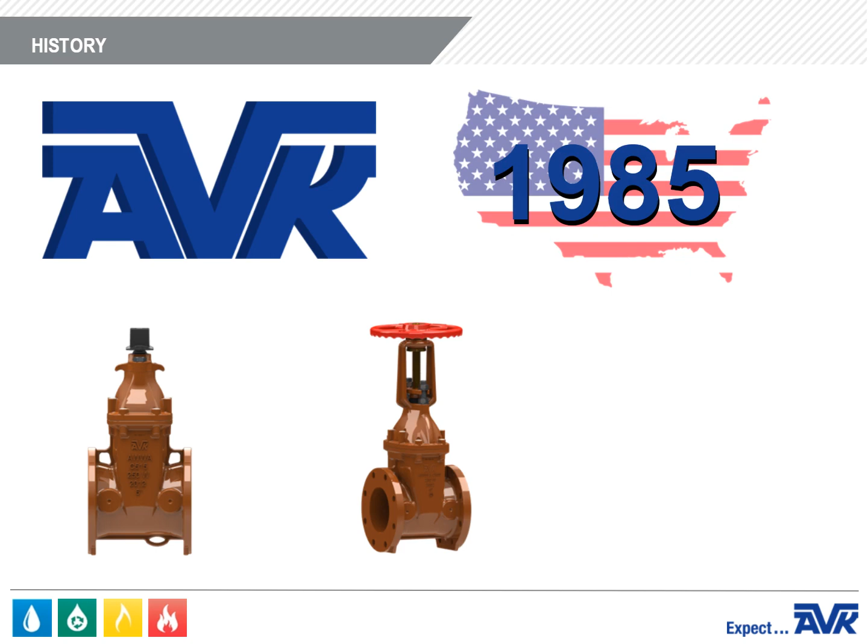American AVK was incorporated in the United States in 1985 and primarily sold AVK gate valves in the North American water distribution market. But AVK soon realized that to be competitive, they needed a fire hydrant to package with the gate valves. So in the early 1990s, AVK began manufacturing the Series 27 dry barrel fire hydrants.

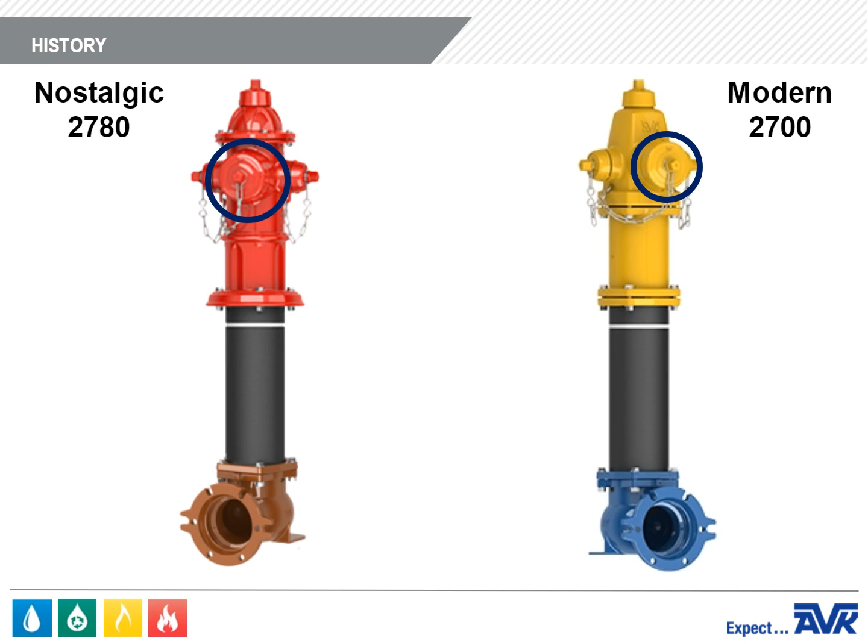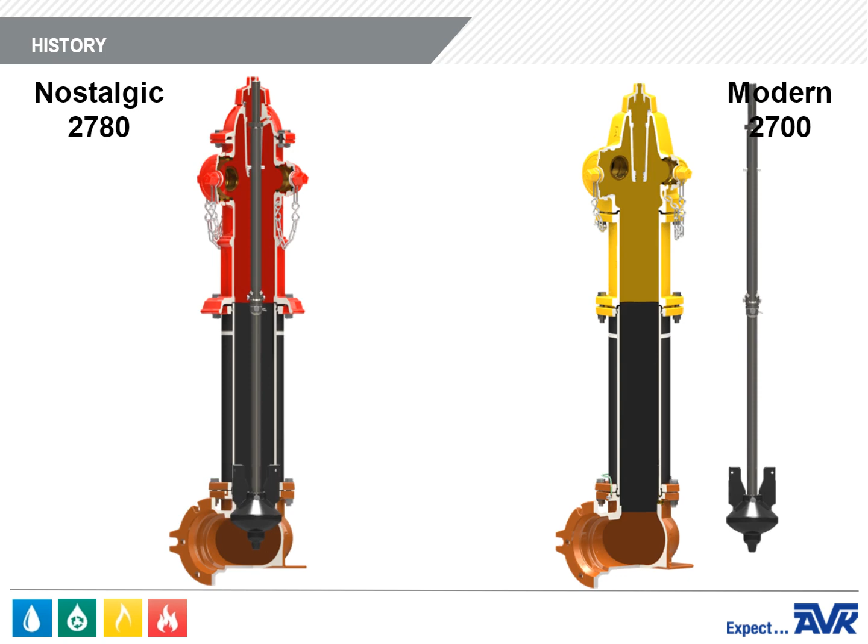AVK manufactures two types of dry barrel fire hydrants: the nostalgic style, Series 2780, and the modern style, Series 2700. The two Series 27 fire hydrants shown here have one pumper outlet and two hose outlets. The nostalgic style is red and the modern style is yellow. Both have a standard 6-inch mechanical joint inlet shoe and standard 1.5-inch pentagon-shaped operating nuts. Keep in mind that all of the parts for the 2700 and the 2780 are interchangeable.

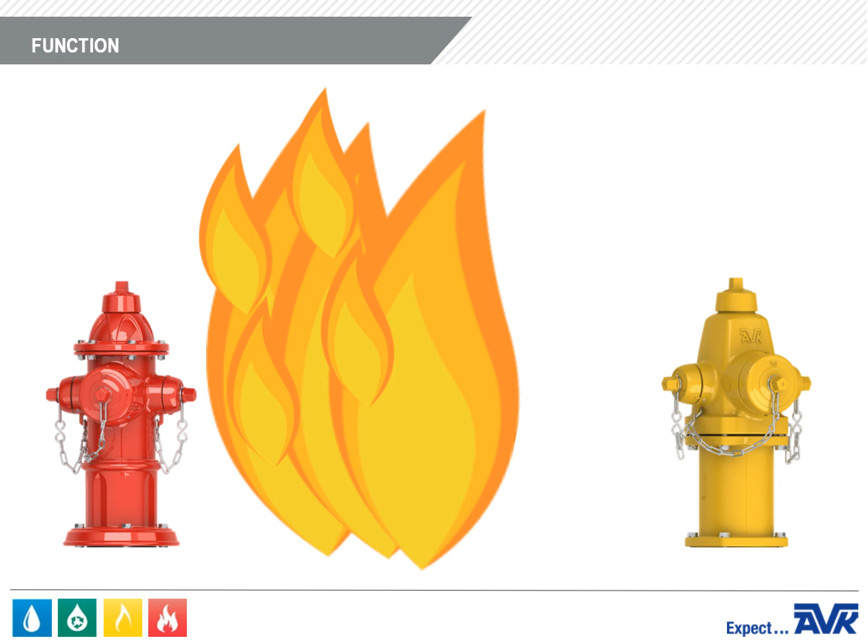So what is a fire hydrant used for? The primary and by far most important function of a fire hydrant is to provide a source of water in order to fight fires. But fire hydrants also serve other purposes, like flushing water lines, filling water trucks, especially at construction sites, and occasionally serving as a construction bypass.

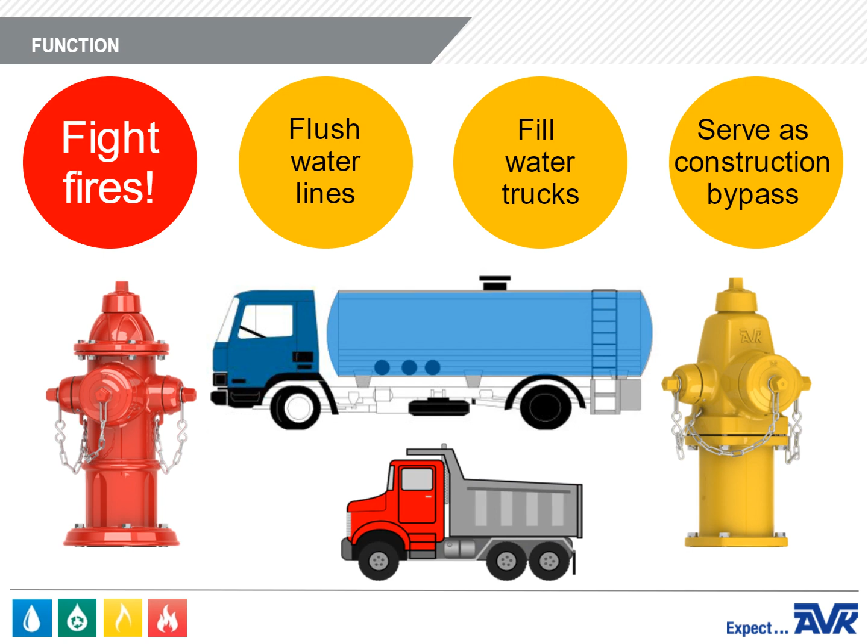AVK fire hydrants are fully compliant with the requirements of AWWA Standard C502 for dry barrel fire hydrants. In fact, AVK hydrants exceed industry standards in regard to flow characteristics and durability. Our hydrants are also listed by Underwriters Labs and approved by Factory Mutual. Finally, all AVK fire hydrants are certified to NSF 61 for health effects and NSF 372 for the low lead requirements of the Safe Drinking Water Act.

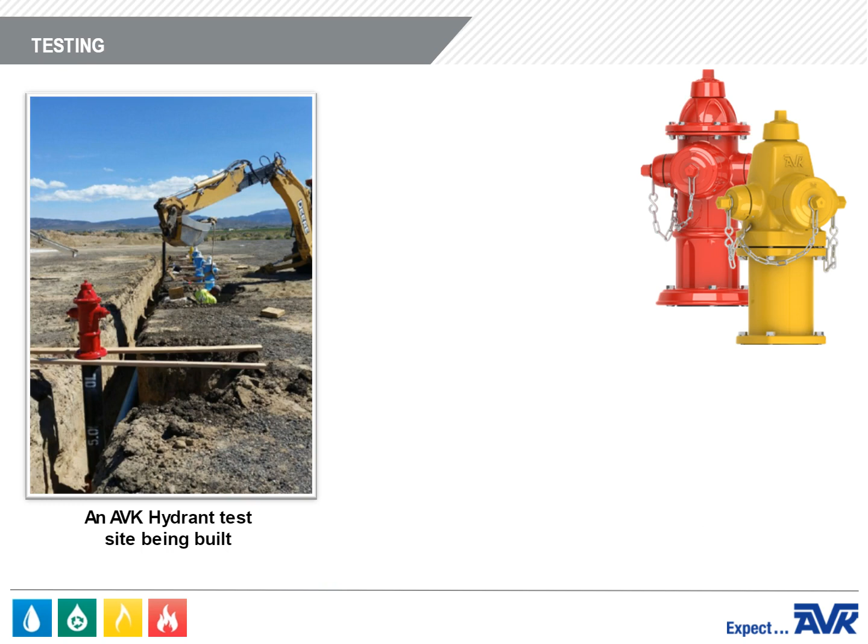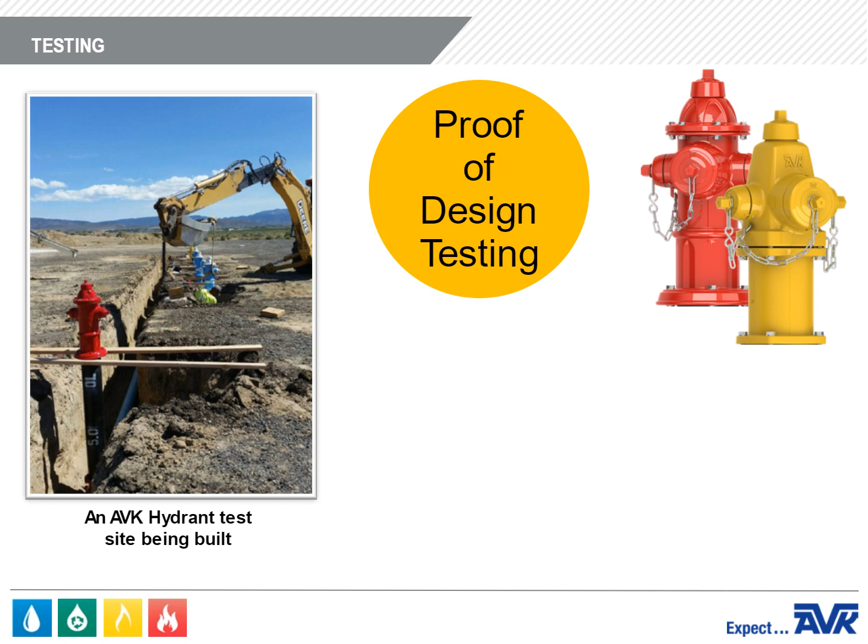Be assured that product quality and safety are our main concerns throughout the design and manufacturing process. Each hydrant is shell tested and seat tested at twice the rated pressure as required by AWWA C502. In addition, we have completed proof of design testing, a shell test of 1000 psi per UL requirements, traffic impact testing, and flow testing. So what makes up an AVK fire hydrant?

Starting at the top of the hydrant is a serial number. This unique number indicates the date of manufacture, testing results, construction materials, and shipping information for full traceability to allow for the industry's quickest and most comprehensive customer service.

Next is the weather shield. The weather shield is a hat-shaped part that sits on top of the hydrant. As you might expect, the weather shield protects the operating mechanism from the elements, like rain or snow. It also protects the bronze operating nut from damage from non-standard wrenches. So if someone tries to operate the hydrant with a pipe wrench, it might damage the ductile iron, but it won't damage the bronze operating nut. And in the unlikely event that the weather shield does get damaged, it's easier and less expensive to replace than the bronze operating nut.

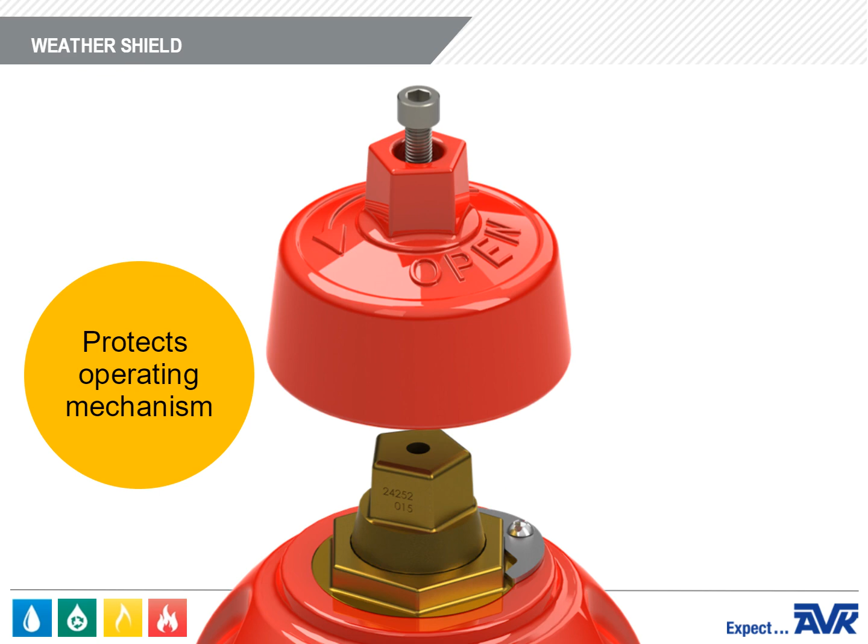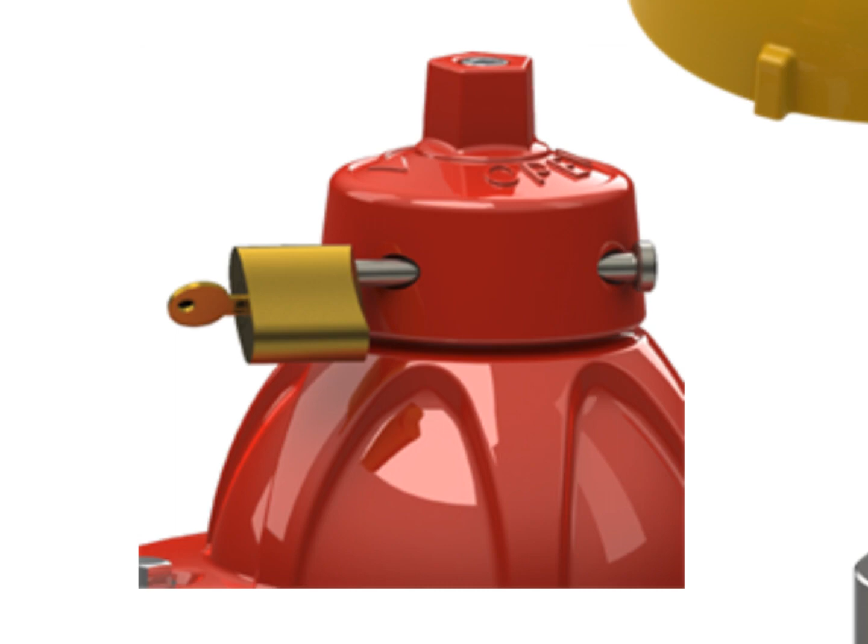The AVK weather shield and nozzle cap operating nuts can be manufactured in a variety of shapes and sizes to meet the needs of local specifications. In areas that require protection from tampering, we can also add locking mechanisms, which can be installed during the manufacturing process or in the field. Or we can add a tamper-proof operating nut.

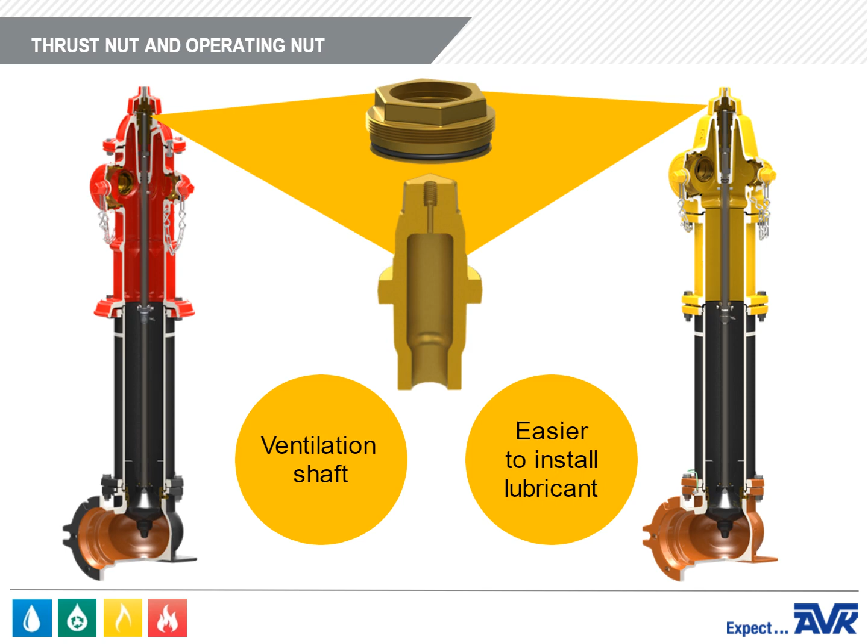The thrust nut and the operating nut are cast bronze. The operating nut can be either open left or open right. The operating nut is manufactured with a ventilation shaft that works in conjunction with the Zerk fitting for ease of installing lubricant. The nut is also provided with an upper and lower anti-friction washer to ease operation. The operating nut and the thrust nut are also equipped with a series of O-rings to isolate the lubrication chamber from the environment. The thrust nut is held in place by a stainless steel thrust nut lock plate and screw.

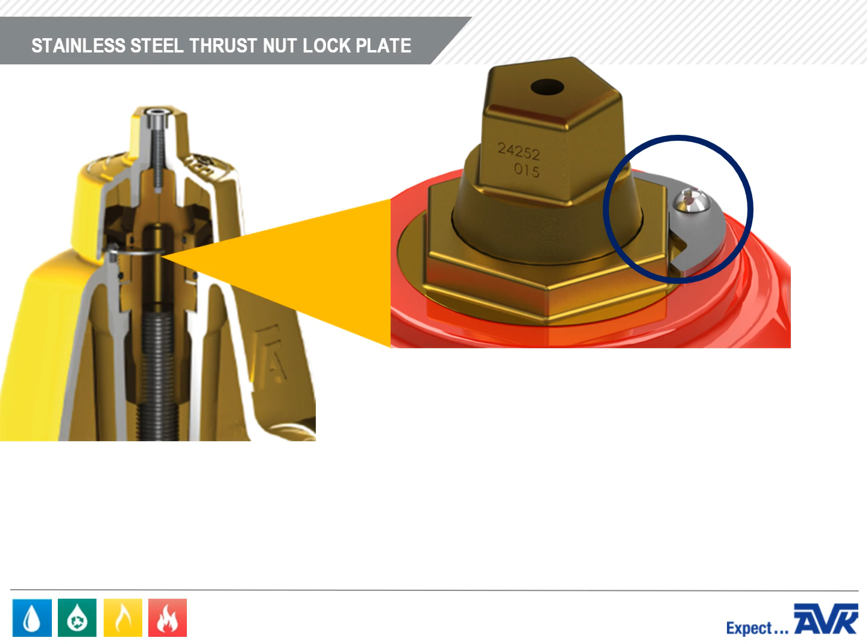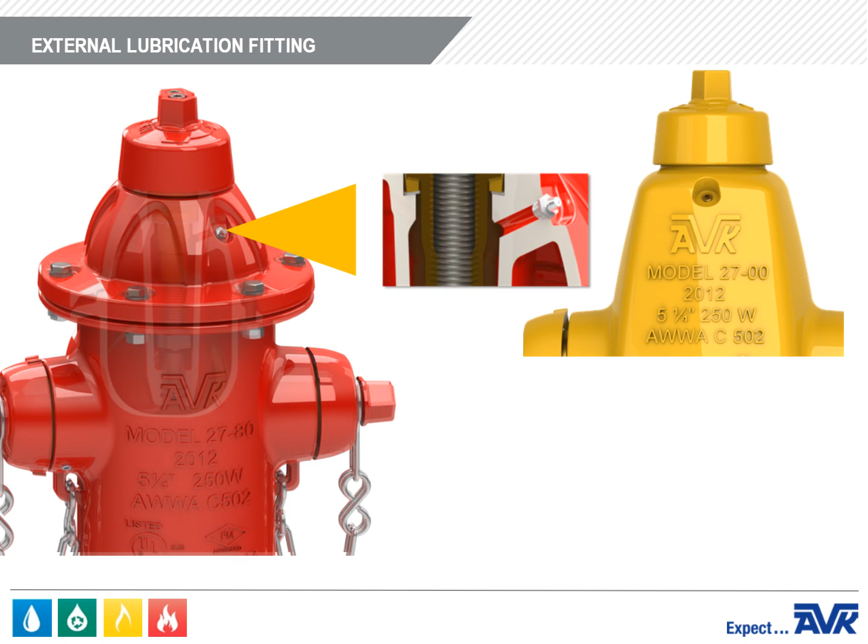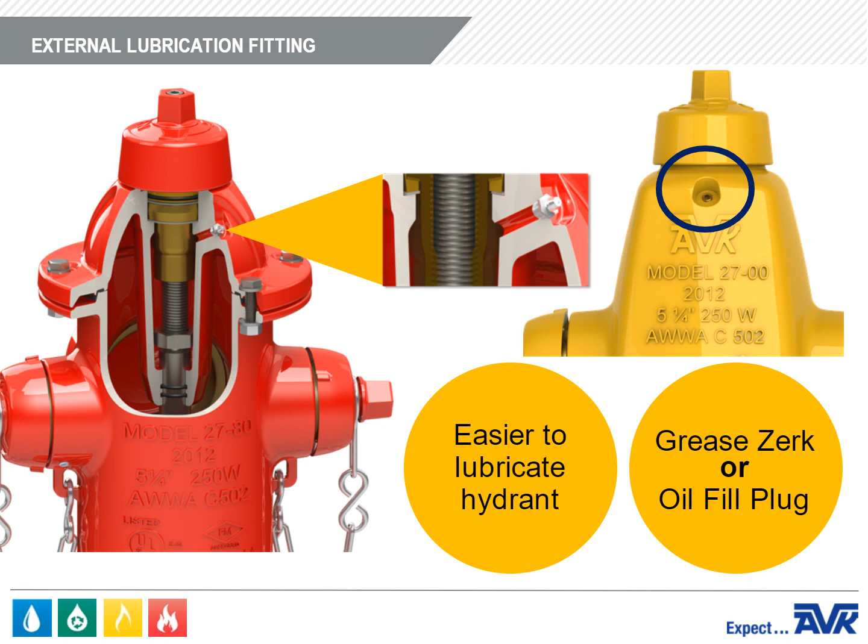The plate is non-corrosive, and it makes it easier to adjust the nut in case the nut is too tight or too loose. AVK fire hydrants are equipped with an external lubrication fitting, making it easier to lubricate the hydrant. No disassembly is required. The fitting is a grease zerk for grease-filled hydrants or an oil fill plug for oil-filled hydrants.

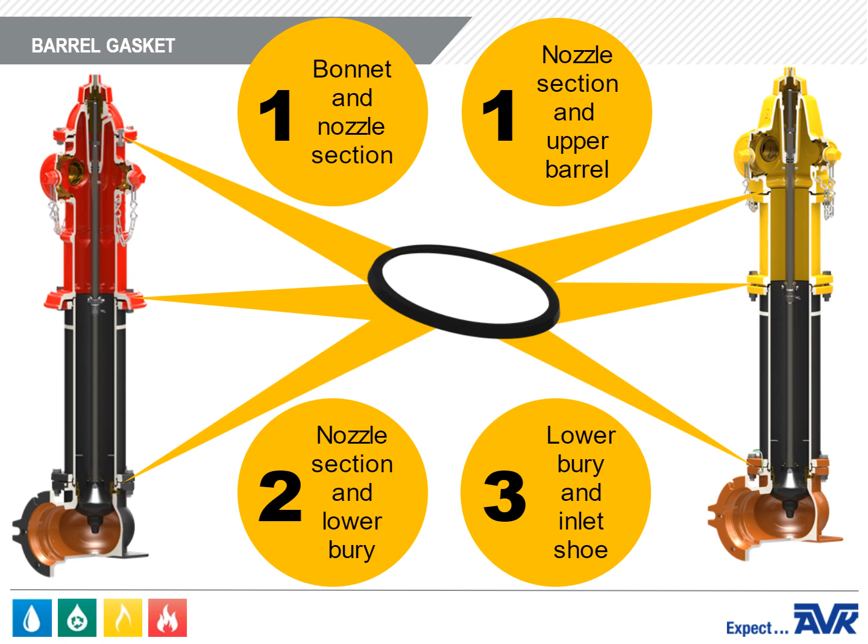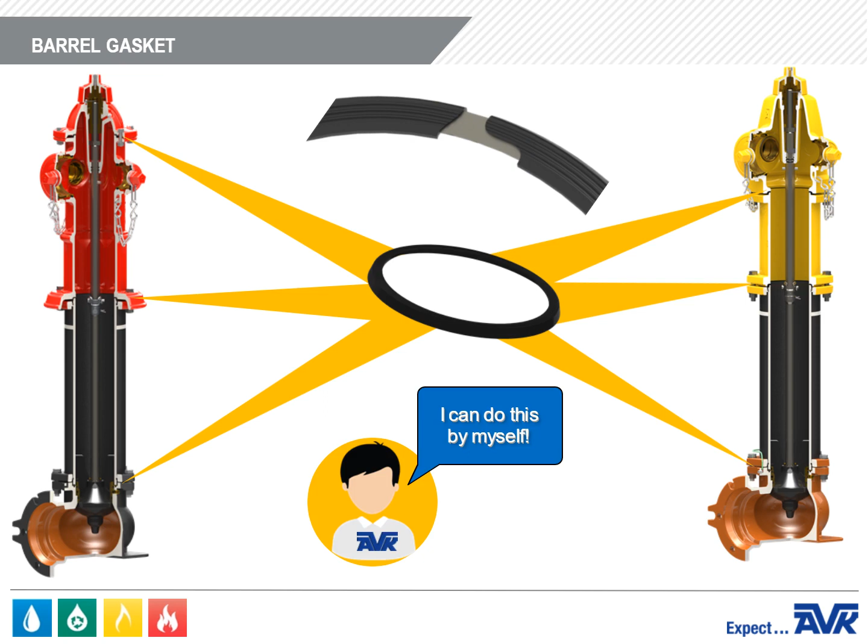Next is the barrel gasket. Three barrel gaskets are used in our dry barrel fire hydrant. The first is used between the bonnet and the nozzle section on the 2780 nostalgic style, or the nozzle section and the upper barrel for the 2700 modern style. The second is between the nozzle section and the lower barrel. And the third is between the lower barrel and the inlet shoe. It's a simple part made out of NBR. It has a steel insert to help hold its shape, so when you place it on the sealing surface it will stay in place. This feature also makes it much easier for one person to reassemble the hydrant.

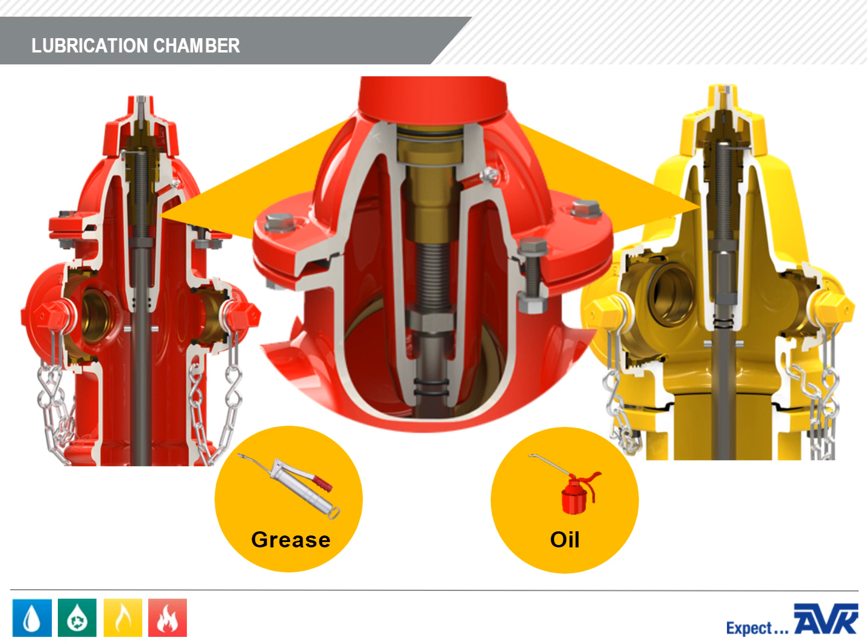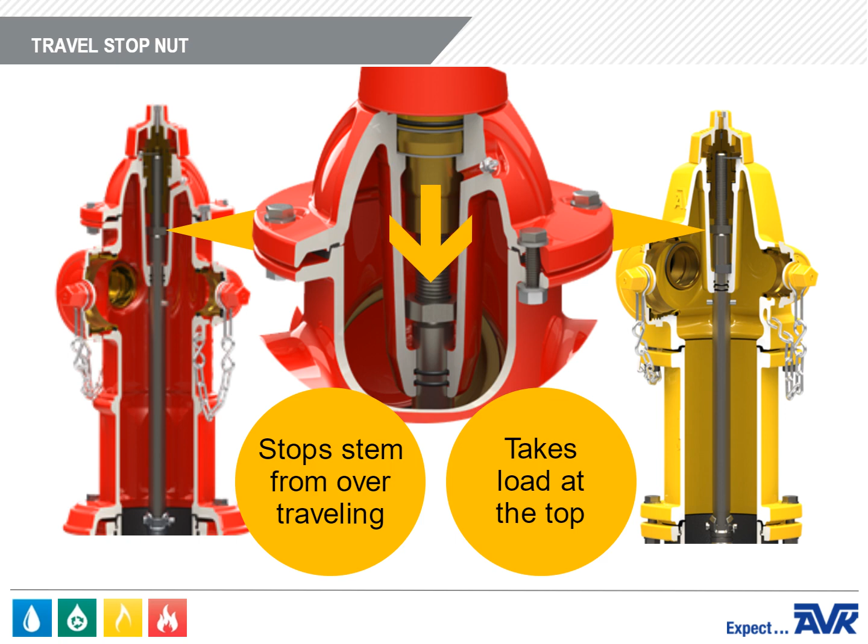Next is the lubrication chamber. It holds the oil or grease to lubricate the operating mechanism for the hydrant. It's sealed with 2 O-rings on the bottom for redundancy and another O-ring at the top to prevent moisture from getting inside. The travel stop nut is used to stop the stem from over-traveling when opening the hydrant. The travel stop nut takes all of the load at the top, so that the main valve and the stem are not damaged by having a compression load on them between the top and the bottom of the hydrant.

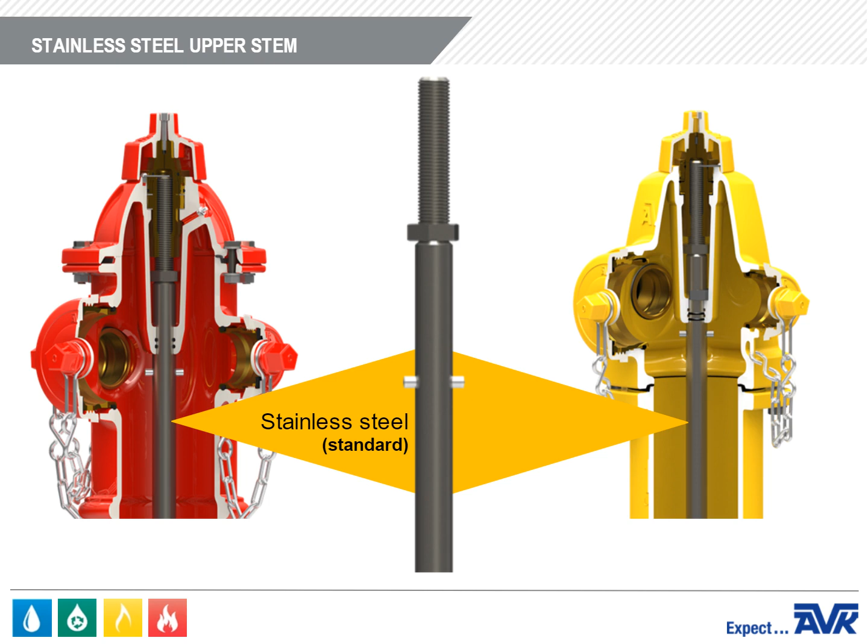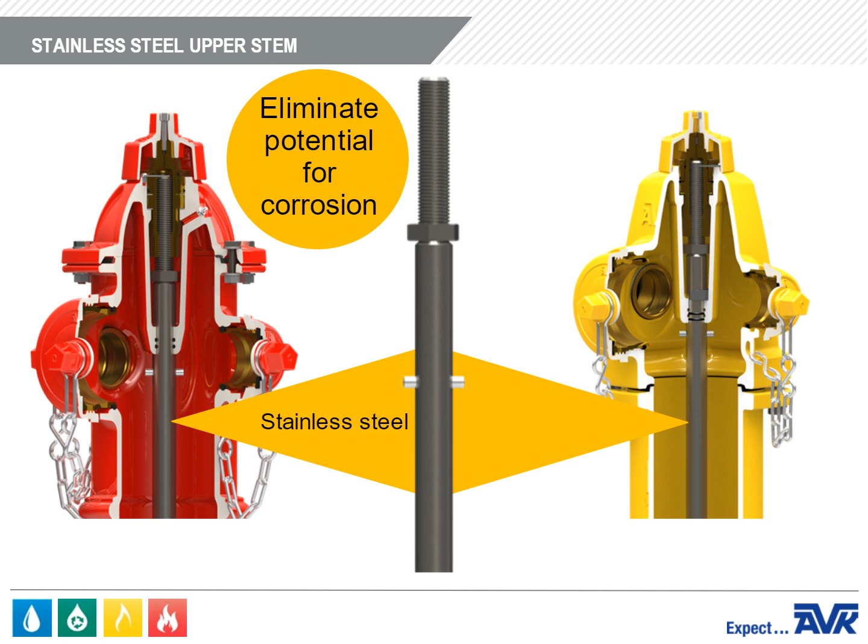All AVK upper stems are stainless steel as standard. However, AVK will supply a copper alloy sleeved upper stem if requested. AVK has chosen to provide stainless steel operating stems to eliminate the potential for corrosion on this vital part of the hydrant operating system. AVK stainless steel upper stems also have the benefit of having a machined smooth surface to seal the O-rings, thus allowing for the elimination of the old soft copper alloy sleeve to seal the reservoir from water intrusion. Removing the copper alloy sleeve eliminates freezing and corrosion that can occur behind it.

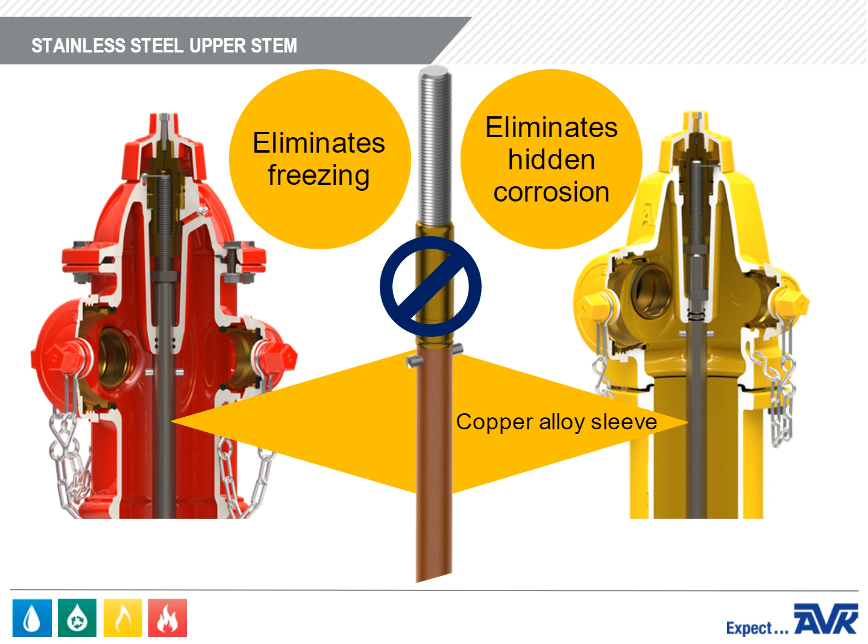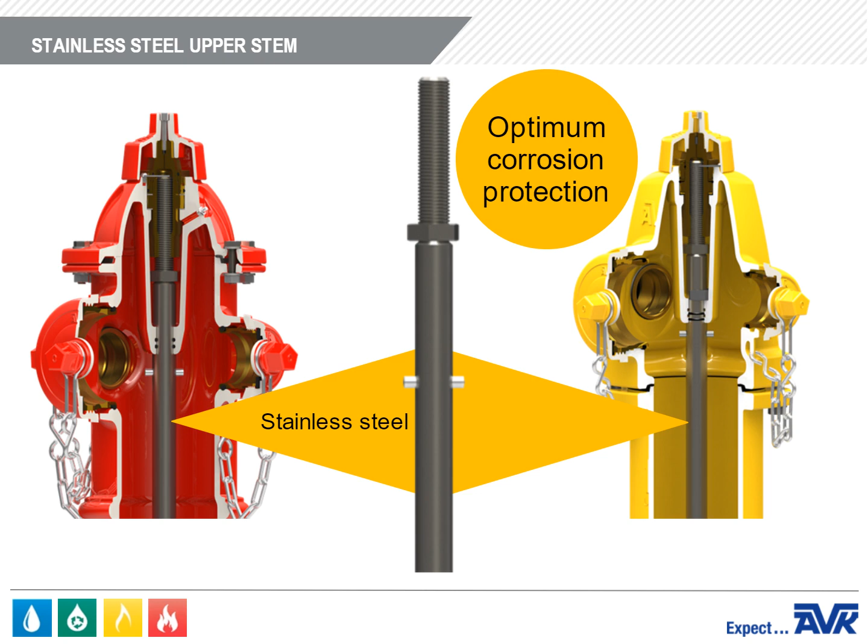Freezing will cause the sleeve to crack, and corrosion will make the hydrant impossible to operate. AVK stainless steel upper stems provide optimum corrosion protection, preventing water that may get into the lubrication chamber from causing the upper stem to corrode. The hydrant wrench pin, located on the upper stem, enables removal of the main valve with a lightweight AVK T-wrench, which makes the hydrant much easier to maintain.

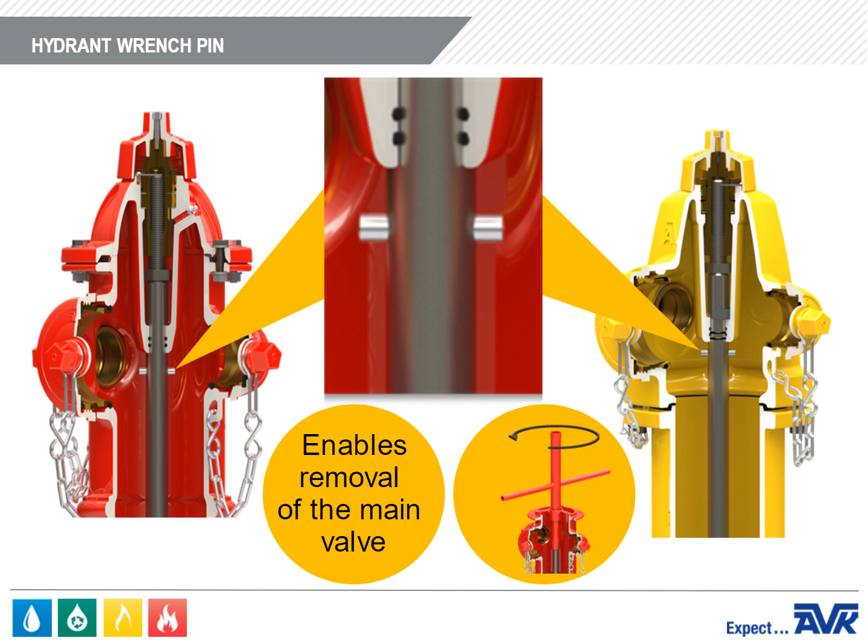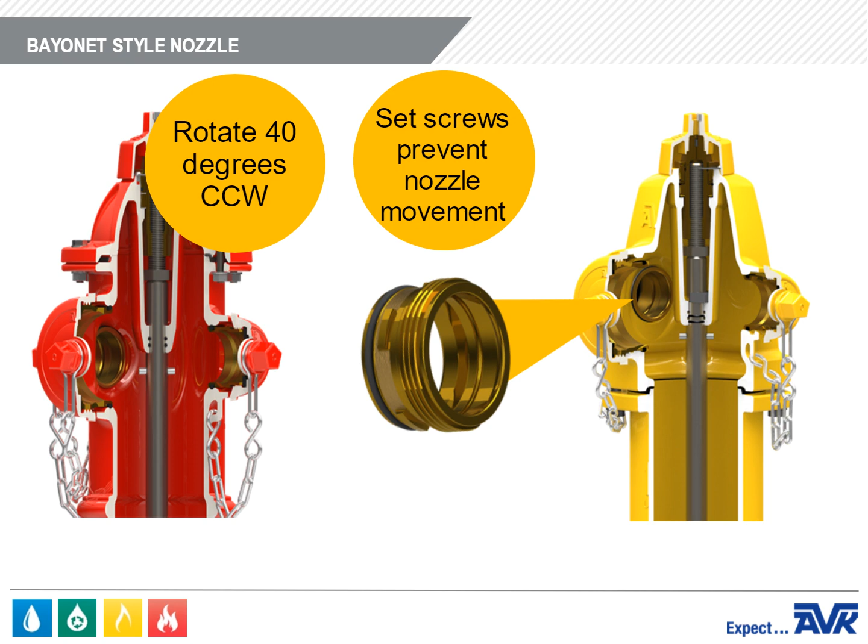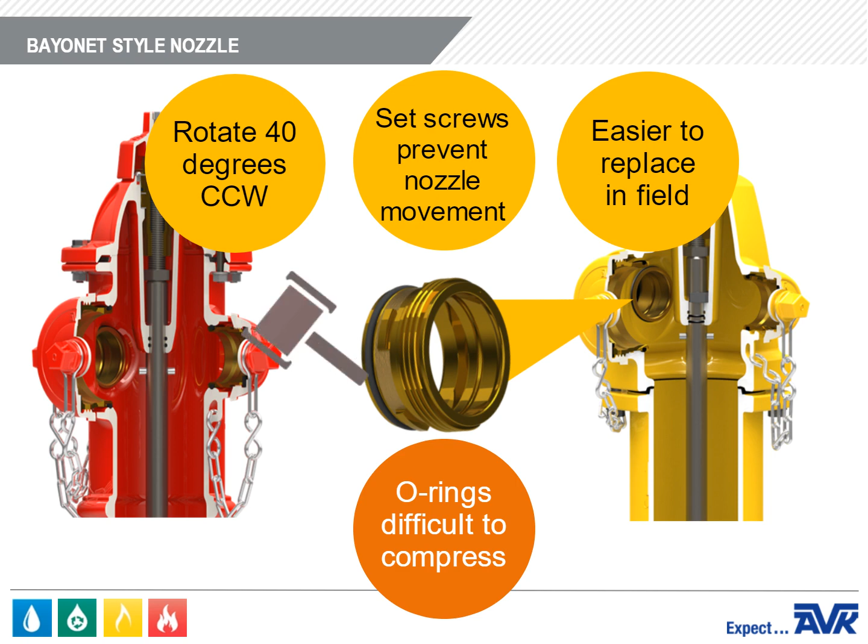Next is the AVK bayonet style nozzle. This nozzle is easy to install. Simply rotate it 40 degrees counterclockwise to lock it in place. There are 2 set screws to prevent it from rotating out and also to help prevent nozzle movement. This feature makes the nozzle much easier to replace in the field. However, it should be noted that the O-rings can be difficult to compress, so you may need a rubber mallet to tap the nozzle into place when you're installing it.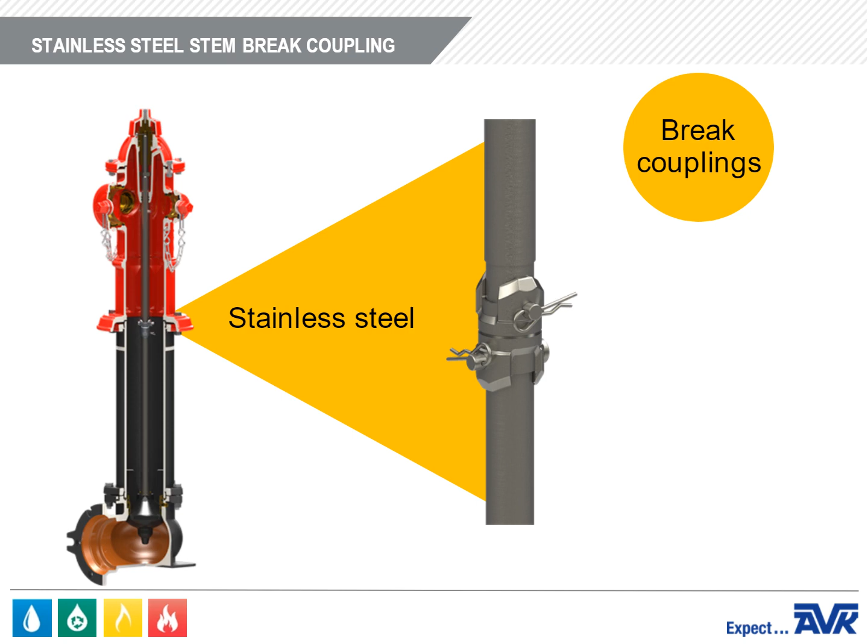To further resist corrosion, AVK uses stainless steel break couplings, extension couplings, and coupling pins on all our dry barrel fire hydrant models. The use of stainless steel assures a longer lifespan due to the more durable materials. This low-profile design also helps improve the flow of the hydrant.

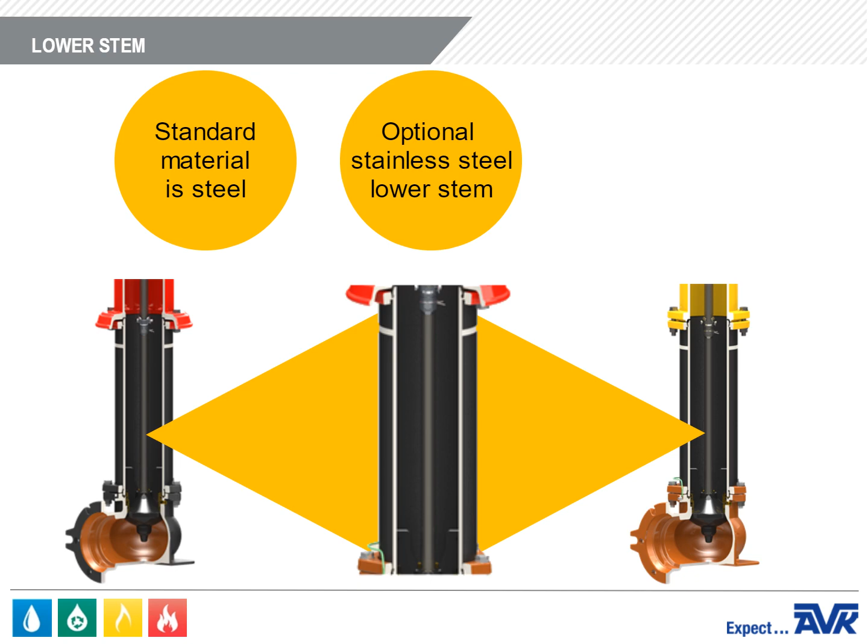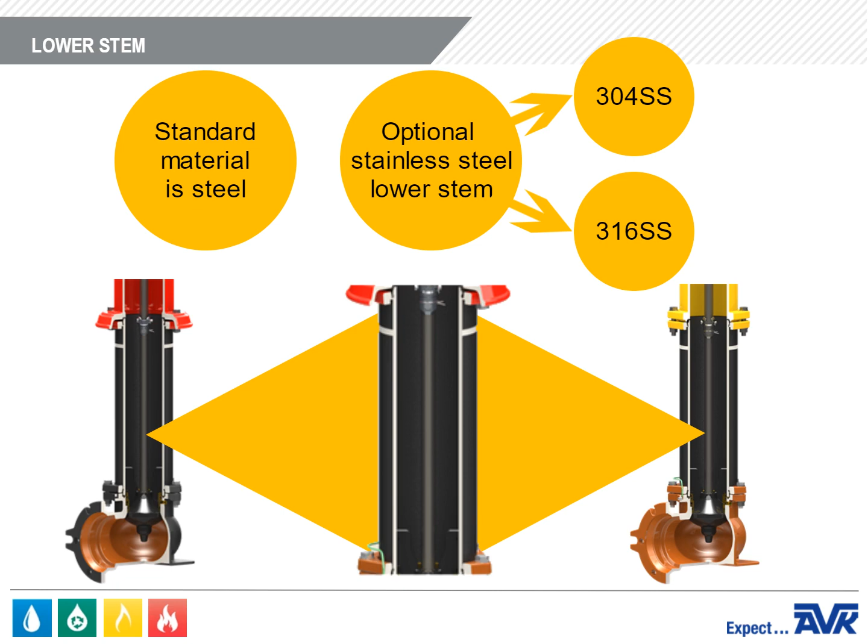The standard material for the lower stem is steel. However, for an additional cost, AVK also offers an optional stainless steel lower operating stem. A stainless steel lower operating stem will reduce the corrosive effects of standing water within the lower barrel of the hydrant. Both upper and lower stems can be provided in 304 stainless steel. They can also be provided in 316 stainless steel for utilities or private industrial facilities that experience very aggressive waters for their major source of fire protection.

Next is the breakable joint, which also includes the stainless steel break coupling for the stem. It uses a standard barrel gasket, so it's easy to reassemble and replace if it gets broken. It's designed so that the ductile iron lip on the break flange will tear out if the hydrant is impacted by a vehicle. There are only 4 bolts, so it's easy to repair. The bolts can be loosened and the nozzle section can rotate 360 degrees so the nozzle can point in whatever direction needed.

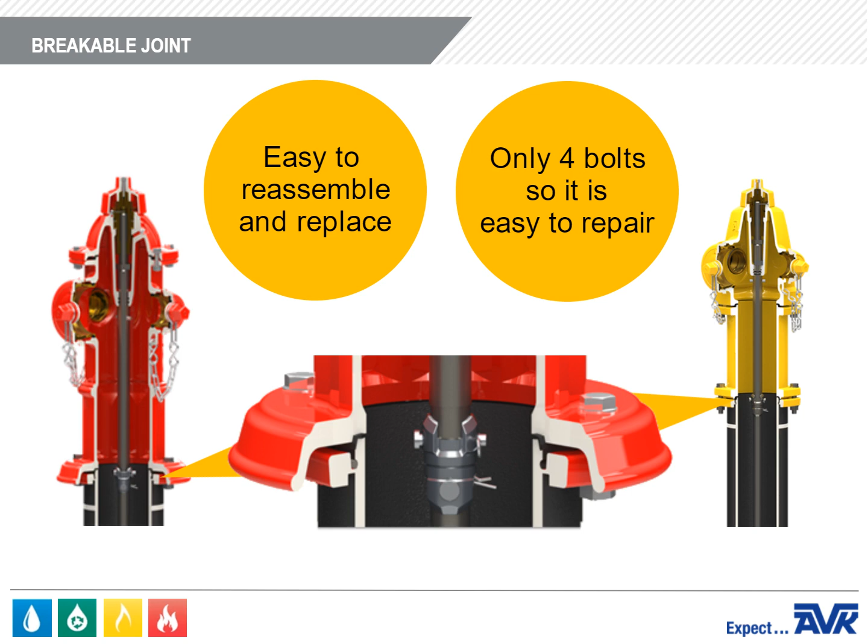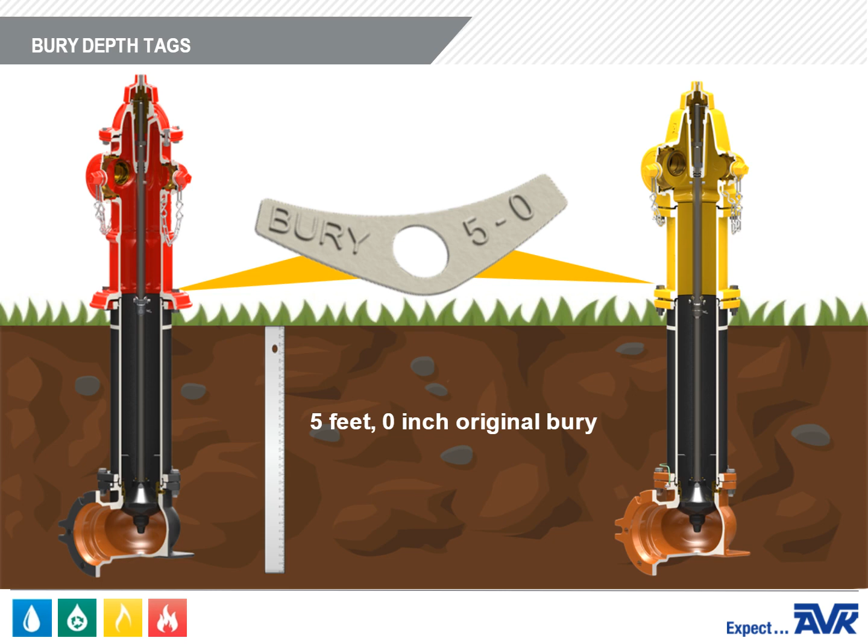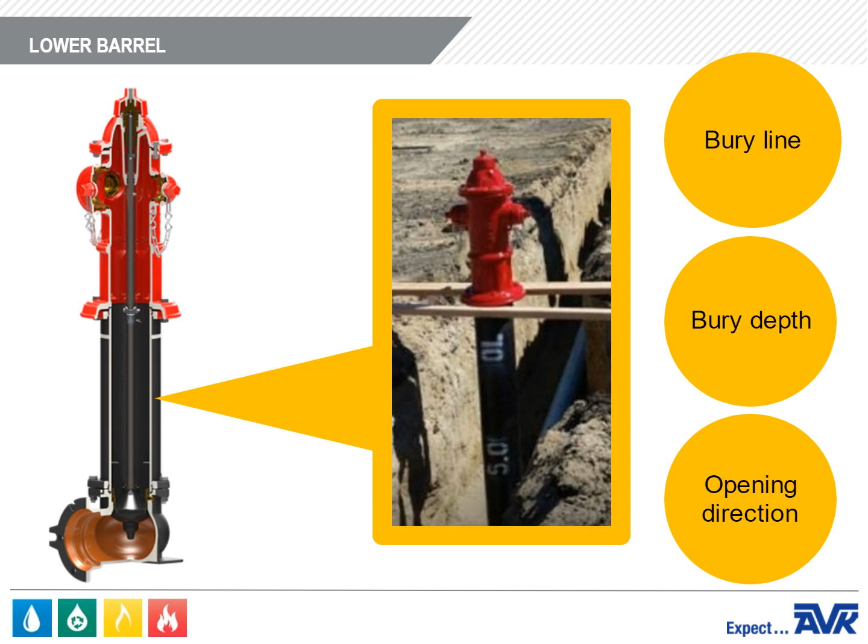At the ground level of the hydrant, AVK installs bury depth tags. This is so it's easy to determine the bury depth by looking at the base of the hydrant when it's installed. The tag here shows a bury depth of 5 feet. The extension kits are also equipped with a bury depth tag, so it can show a 5-foot original bury and a 6-inch extension kit. The lower barrel is ductile iron, which allows the lower barrel to be strong but also lightweight. The lower barrel is also stenciled with the bury line, the depth of bury, and the opening direction. For example, a 5-foot bury open left hydrant will have 5.0 and OL stenciled on it.

At the base of the hydrant, there's a new design called the 5-bolt base. This new design makes it easier to remove the main valve. It also makes the hydrant more resilient against low-speed impacts. With the old design, if a hydrant was surrounded by muddy soil and was hit at a low speed, the whole hydrant might have tipped over and broken at the inlet. The new 5-bolt design helps prevent that.

The old design required studs and multiple nuts. The new design requires a simple nut and bolt, which are stainless steel, as standard. Finally, the 5-bolt design provides lower head loss because the main valve ears can be used to direct the flow upward when the hydrant is operating.

The hydrant shoe is equipped with an anode lug. This allows easy attachment of a sacrificial anode if a water utility happens to use those for cathodic corrosion protection. There's no need for welding, which can cause damage to the hydrant. There's a flat plate on the back and the bottom of the shoe to make installation easy.

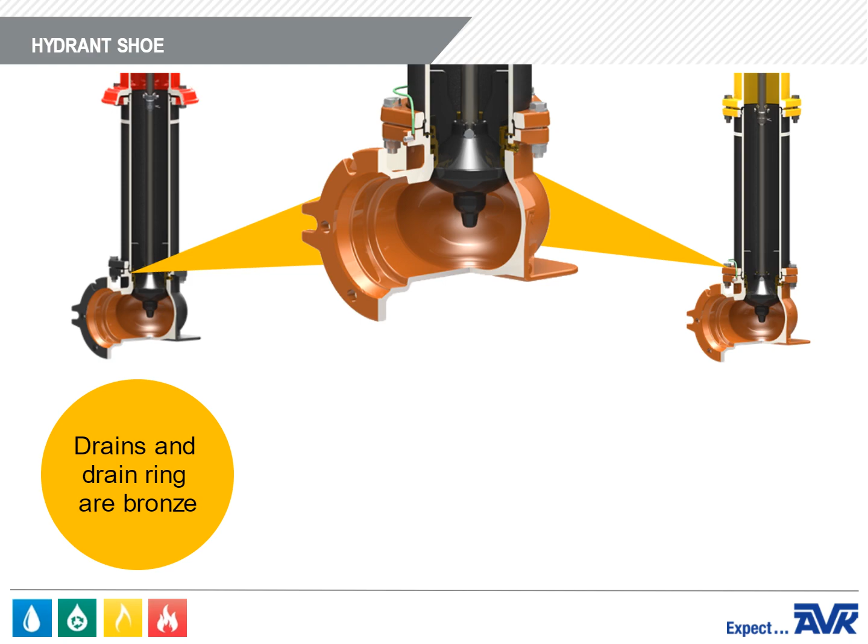The drains and the drain ring are all bronze, corrosion resistant, and can be easily plugged if required. As mentioned previously, the buried bolting is stainless steel at the base, which is corrosion resistant for a long life.

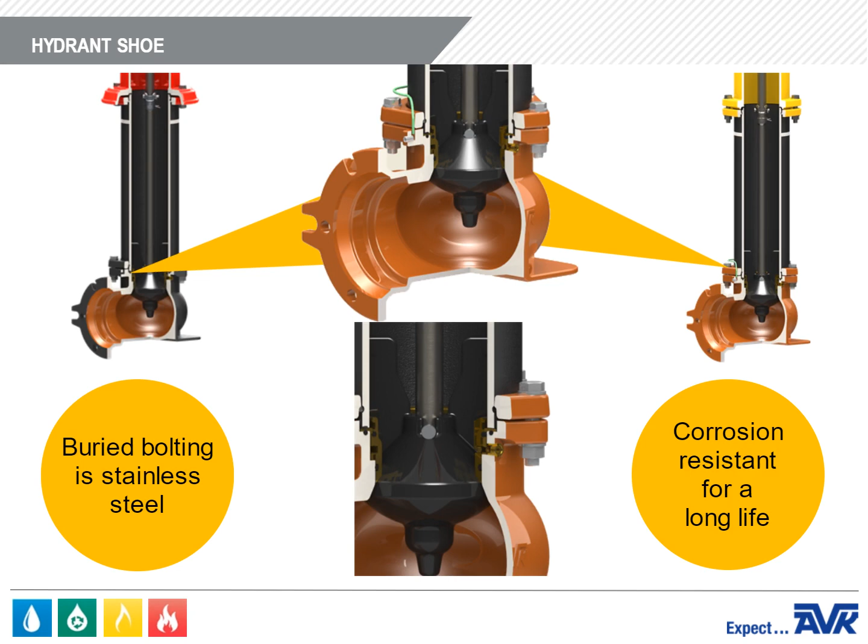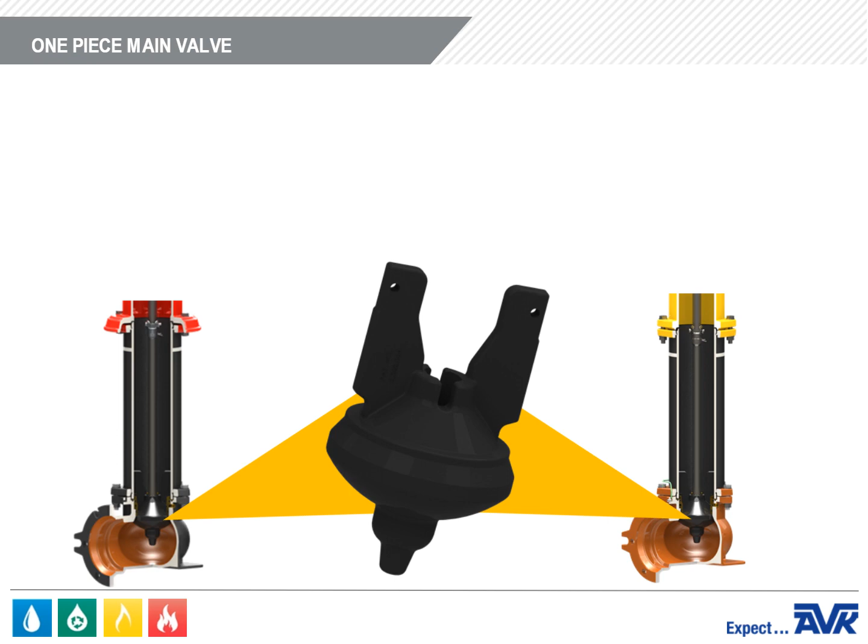Located at the bottom of the hydrant is one of the more important features of the AVK hydrant, the one-piece main valve. The main valve is a ductile iron core encapsulated in EPDM. EPDM is resistant to chlorine and other disinfectants, so it will have a long life. The main valve eliminates a large number of parts which are used by our competitors to build hydrants. This reduces parts inventory and also makes it very easy to replace.

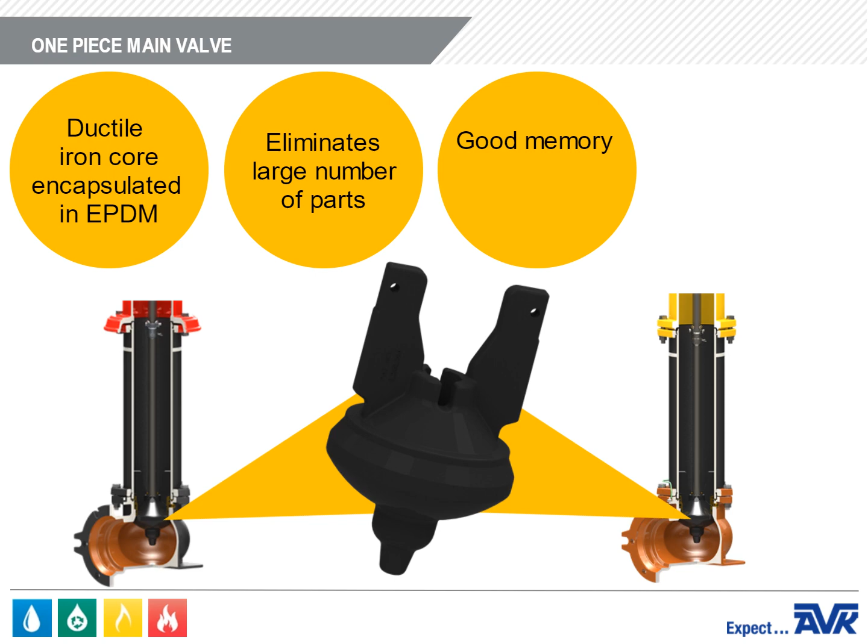The main valve is a very durable component with a very good memory, and the shore hardness of the rubber is 85. So if there's a rock embedded in the hydrant, all you have to do is open it for a while, pop the rock out of the valve, and it will regain its shape. It's very durable and long-lasting.

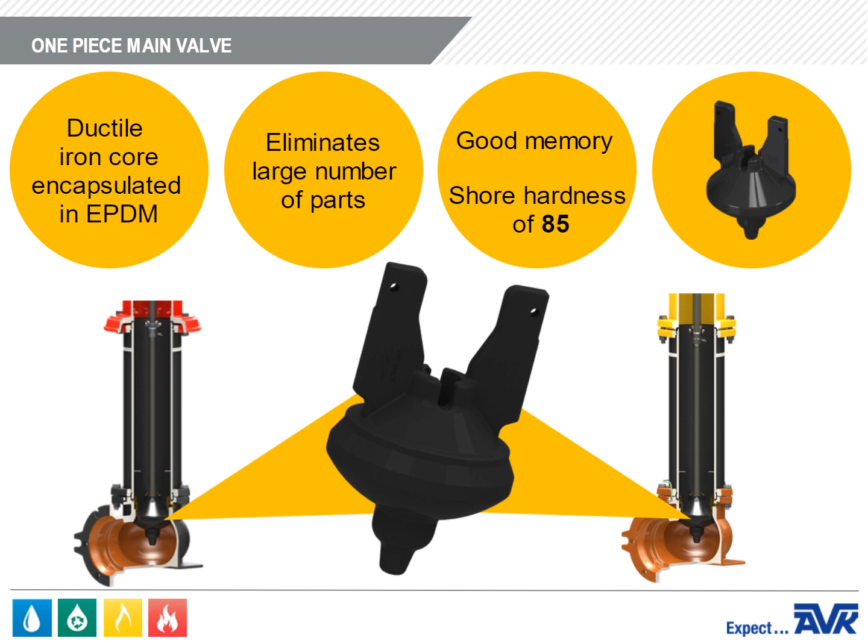The internal and the external coatings of the nozzle section and the shoe are fusion-bonded epoxy for good corrosion protection. Epoxy provides a smooth lining on the interior for lower head loss. The coating complies with AWWA Standard C550, which covers protective interior coatings for valves and hydrants.

The fusion-bonded epoxy coating is applied on all above-ground sections, both inside and out, as well as the inlet shoe. This coating ensures protection and longevity of the ductile iron castings. The external coating has an additional polyurethane layer to provide the correct color required by the customer and to provide additional corrosion protection.

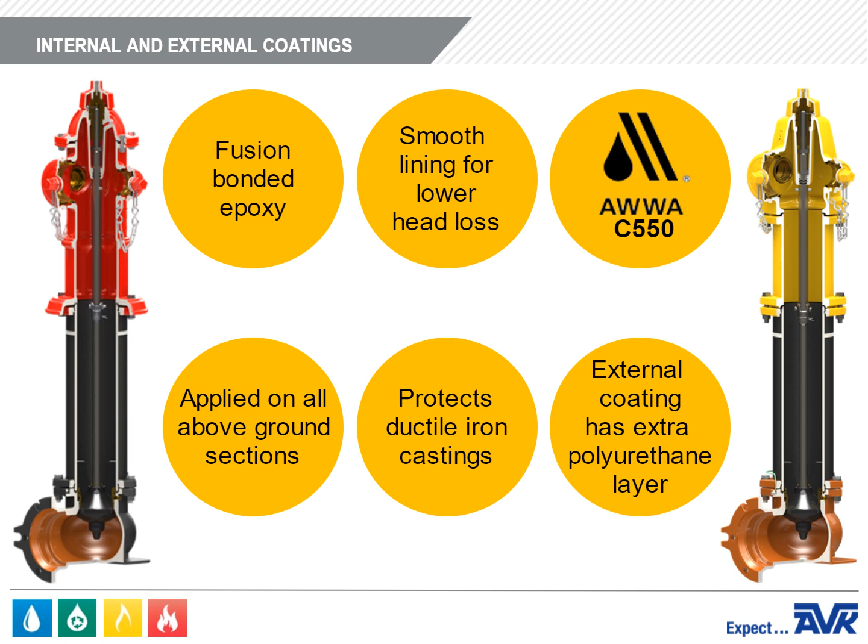Another great feature of AVK fire hydrants is that they have a low parts count. A low parts count means that it takes fewer parts to manufacture an AVK Series 27 fire hydrant than it does our competitor's hydrant. But why is this important? A low parts count is a benefit to our customers because they can maintain a lower parts inventory and they need far less space for parts storage.

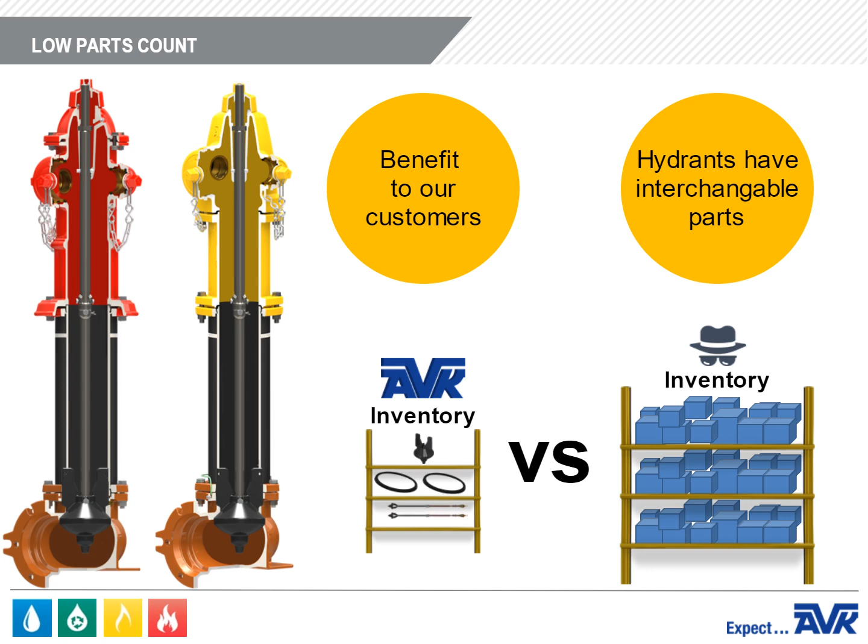In addition, all AVK hydrants have interchangeable parts, and all new modifications are designed to retrofit to previous versions of the Series 27. This assures AVK always has the parts our customers need, which expedites parts delivery, eliminates the customer's need to keep a large parts inventory, and reduces confusion when parts are ordered.

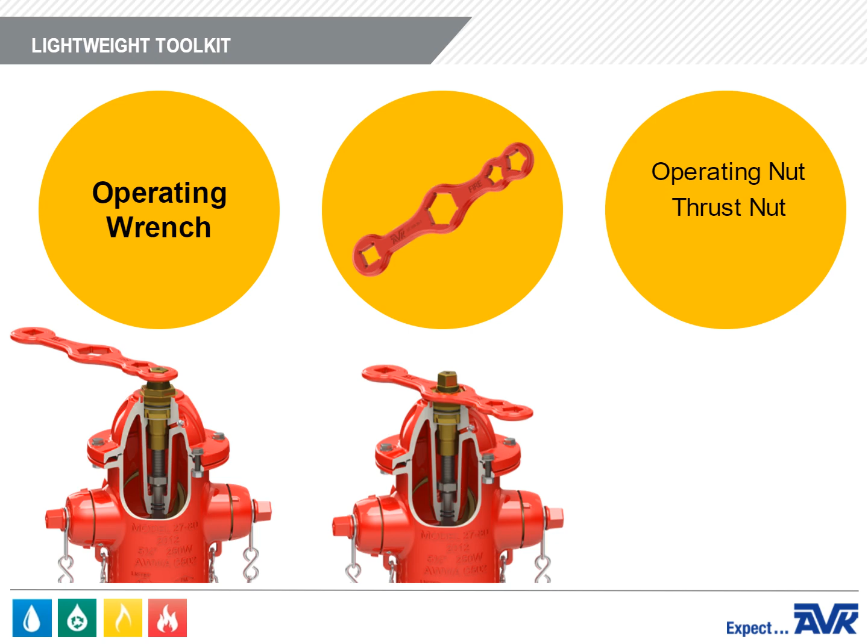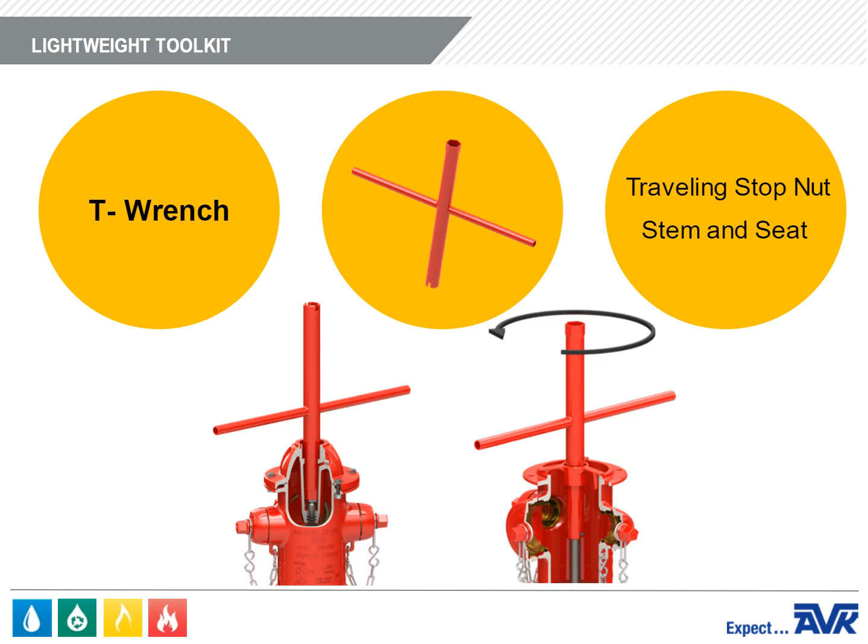AVK also simplifies the inspection, maintenance, and repair of our products by providing a lightweight toolkit. The toolkit includes our operating wrench, which can be used to remove the operating nut, hydrant thrust nut, or caps. Our innovative T-wrench. One end of the T-wrench is used to remove the traveling stop nut located in the lubrication chamber. The other end of the T-wrench is used to remove the stem and seat using the pin located on the upper stem. And our centering tool.

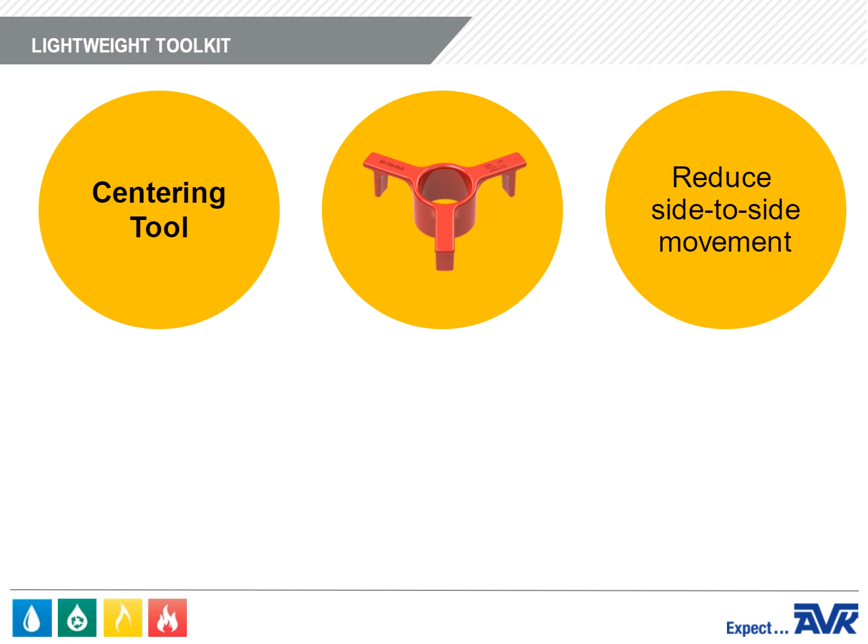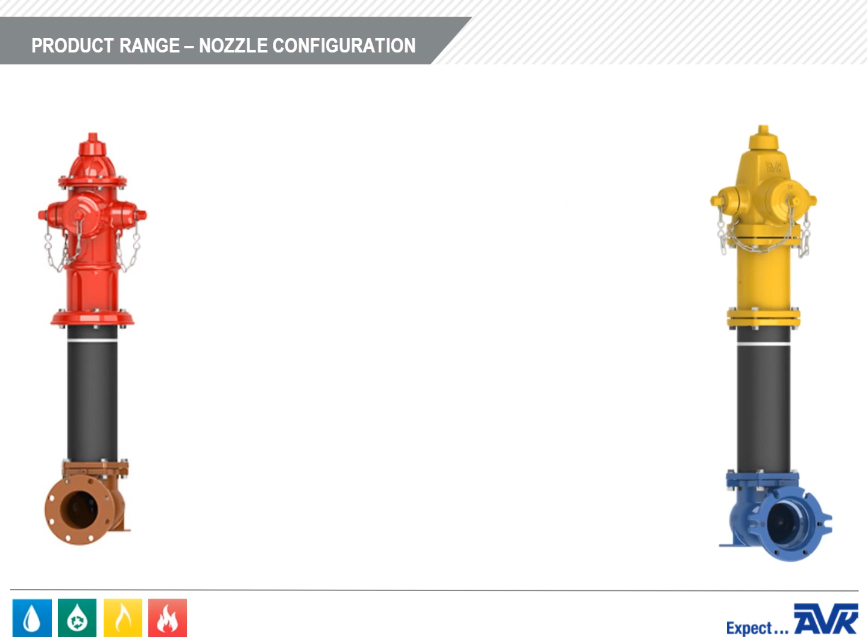The centering tool is used to reduce side-to-side movement of the working components. The removal of all working components can be easily accomplished from above ground with the use of AVK's T-wrench and centering tool.

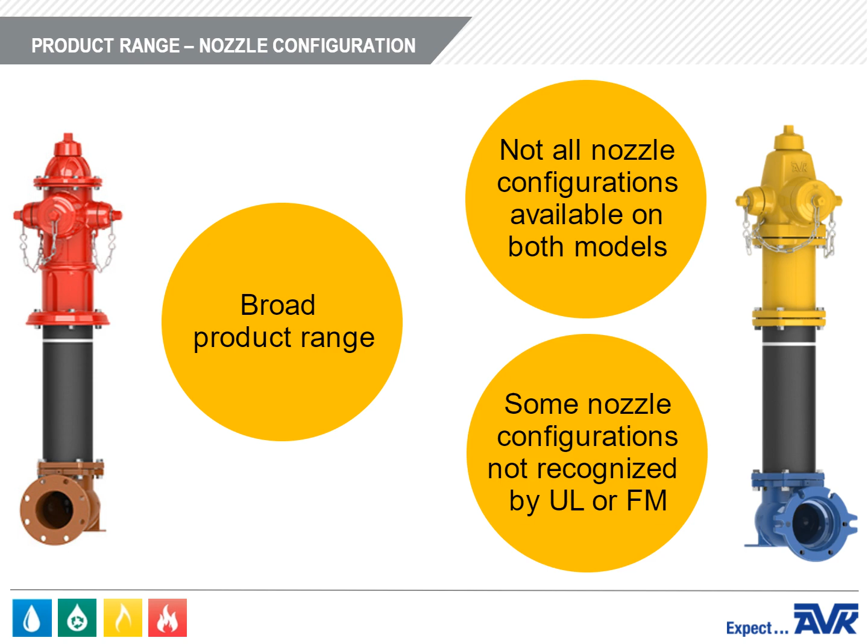The product range of the Series 27 fire hydrant is quite broad. Let's start with a list of the nozzle configurations that are available. Keep in mind that not all configurations are available for both the 2780 and the 2700. It's also important to remember that some nozzle configurations, such as the single pumper configuration, may not be recognized by UL or FM.

The 2780, or the nostalgic, can be configured with the standard 3 outlets, 2 hose outlets, 2 pumper outlets, or a single pumper outlet. The 2700, or the modern, can be configured with 3 outlets, 2 pumper outlets, or a single pumper outlet. There's also the Alpine style for snowy environments, so you can have the hydrant above the snow level. The 2700 can also be configured as a monitor hydrant.

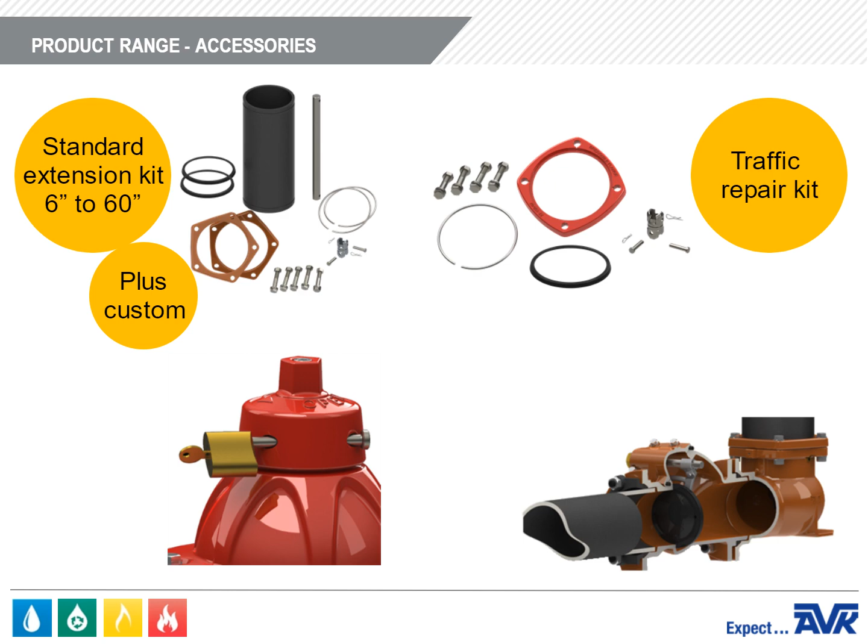We provide a wide range of accessories. The standard extension kits are from 6 inches to 60 inches, and we can also do custom lengths. Traffic repair kits in case the hydrant is knocked over, tamper guards to lock the hydrant and prevent unauthorized operation, and hydrant check valves to prevent possible contamination or cross connections of the distribution system.

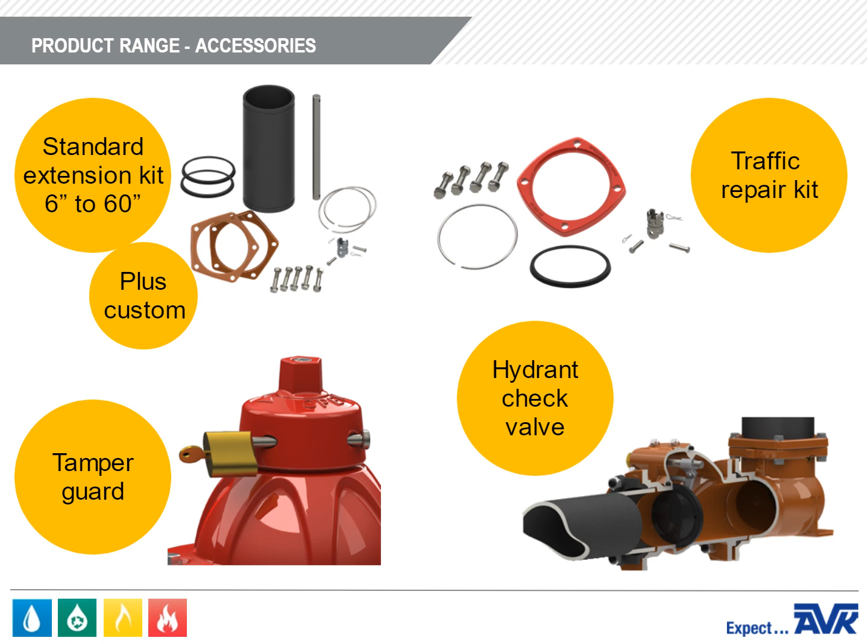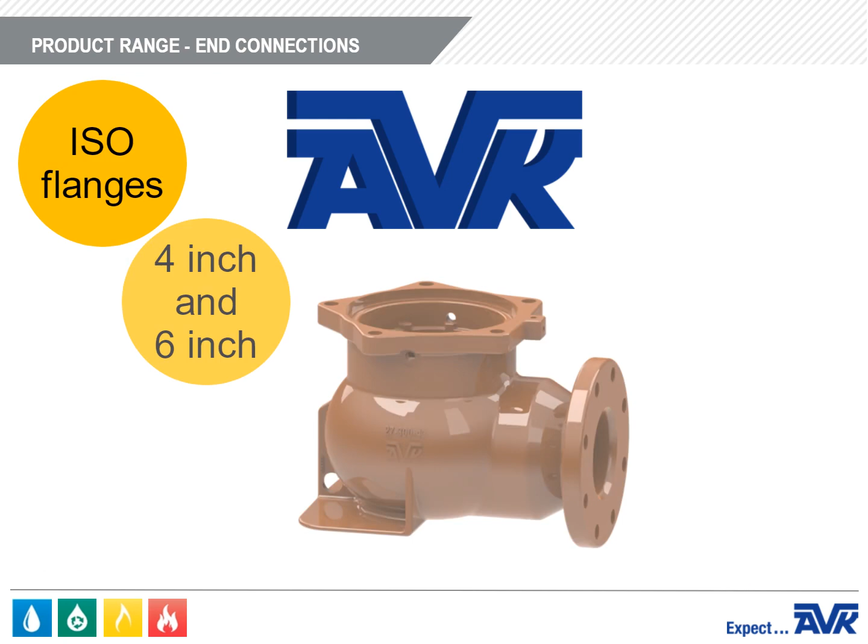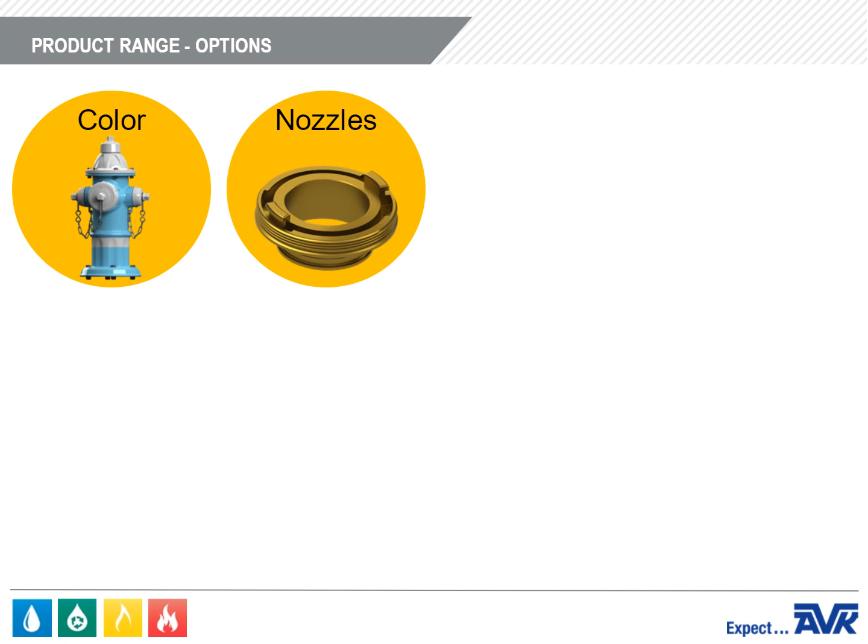The options for an AVK fire hydrant are almost limitless. Color. We can make the body, bonnet, and caps any color or combination of colors for any water utility's requirements. Nozzles. We supply many different types of nozzles and nozzle threads, as well as Storz connections. Pumper nozzle sizes. We can supply 4, 4.5, and 5-inch Storz connections, and also 4 and 4.5-inch threaded connections.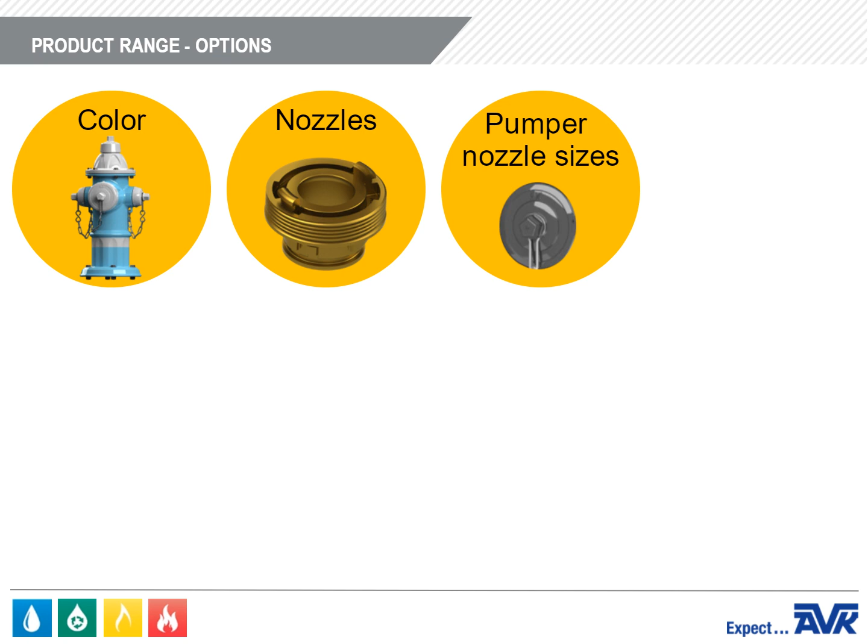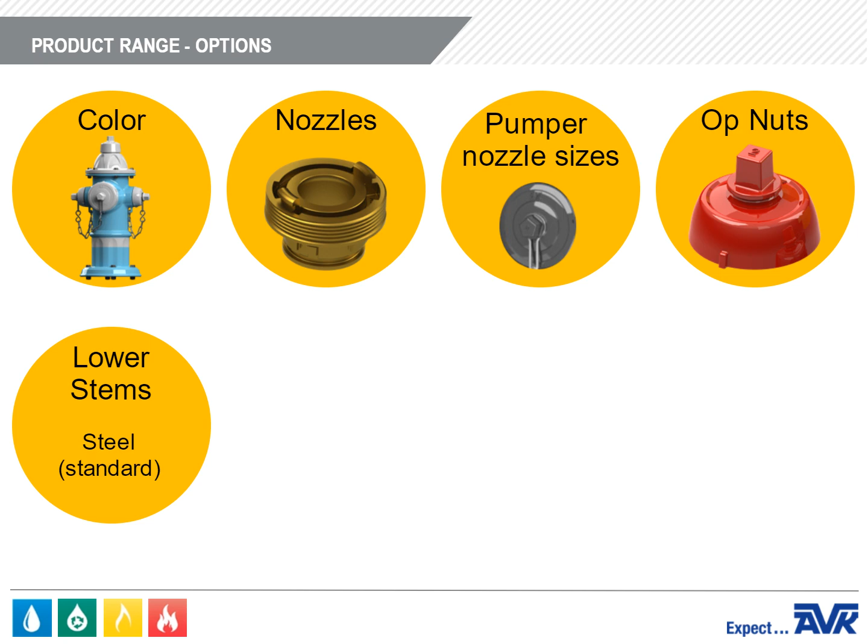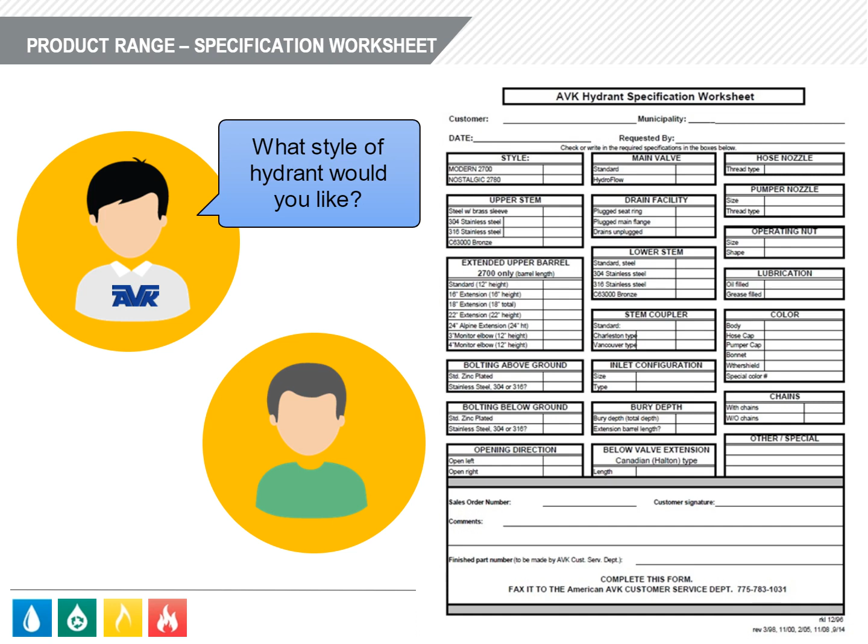Operating nuts come in squares, triangles, pentagons, or they can be custom made. Lower stems can be stainless steel or steel. Bolting. We do zinc-plated, 304 or 316 stainless steel. Zinc is standard. Drains can be plugged or unplugged. Hydrants can be open left or open right. There are so many different options that we use an AVK hydrant specification worksheet. You and the customer can fill the sheet out together. This ensures the customer gets exactly what they want.

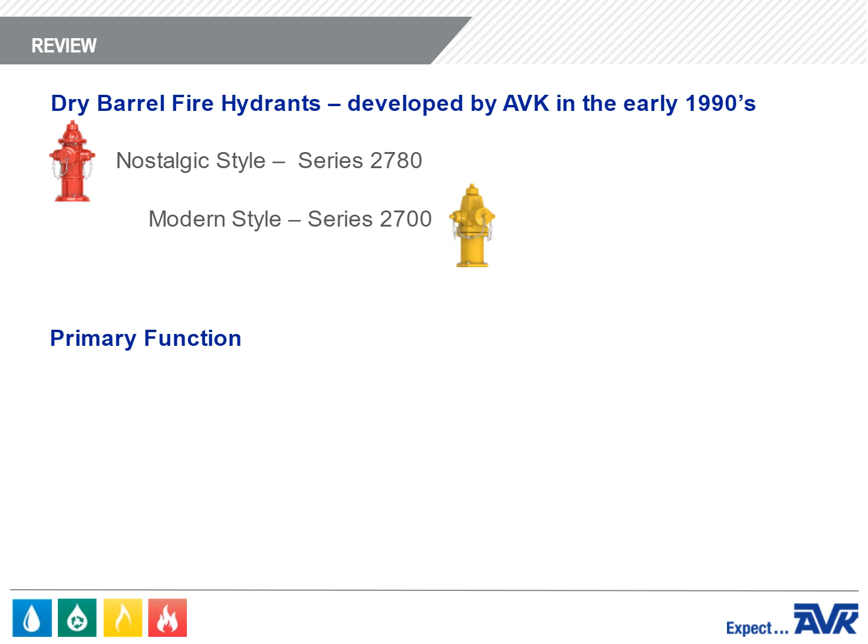Congratulations! You've completed the American AVK Series 27 Dry Barrel Fire Hydrants Overview Module. Now that you've completed this training, let's review the highlights of the module. In this module, you learned that AVK developed the 2 styles of dry barrel fire hydrants in the early 1990s, the nostalgic style, Series 2780, and the modern style, Series 2700. The primary and by far most important function of a fire hydrant is to provide access to water in order to fight fires, but fire hydrants serve other purposes as well.

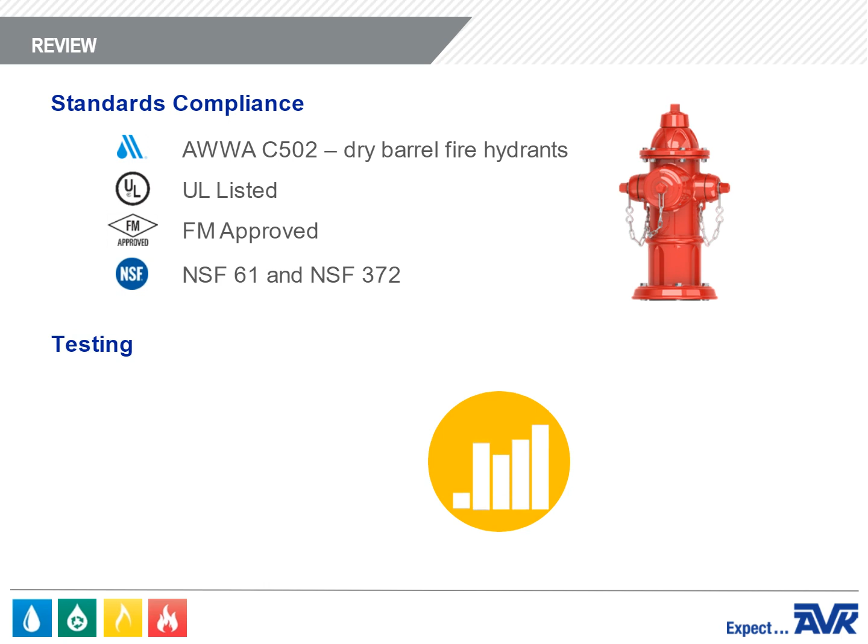AVK fire hydrants are fully compliant with the requirements of AWWA Standard C502 for dry barrel fire hydrants. Our hydrants are also listed by Underwriters Labs and approved by Factory Mutual. Finally, all AVK fire hydrants are certified to NSF 61 for health effects and NSF 372 for the low lead requirements of the Safe Drinking Water Act. AVK has completed seat testing, proof of design testing, shell testing, traffic impact testing, and flow testing.

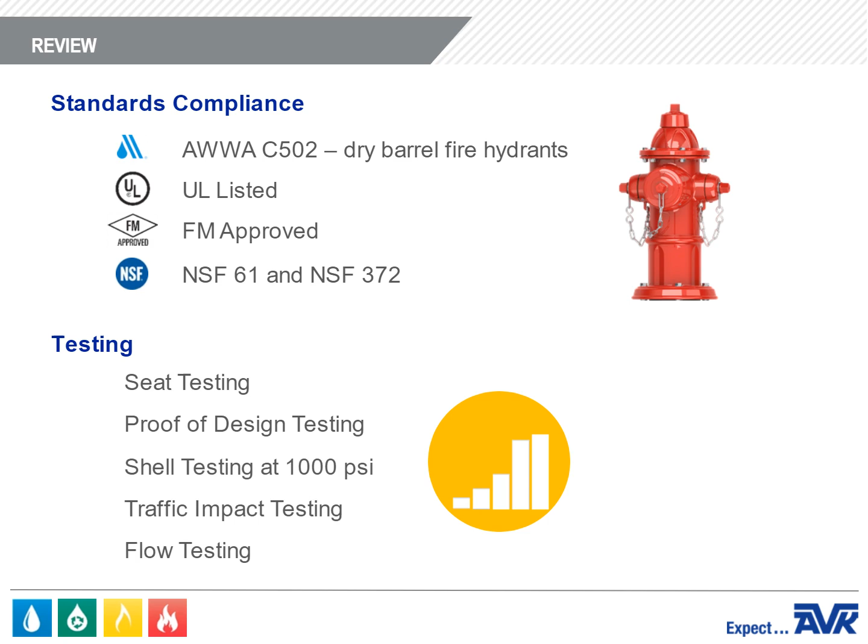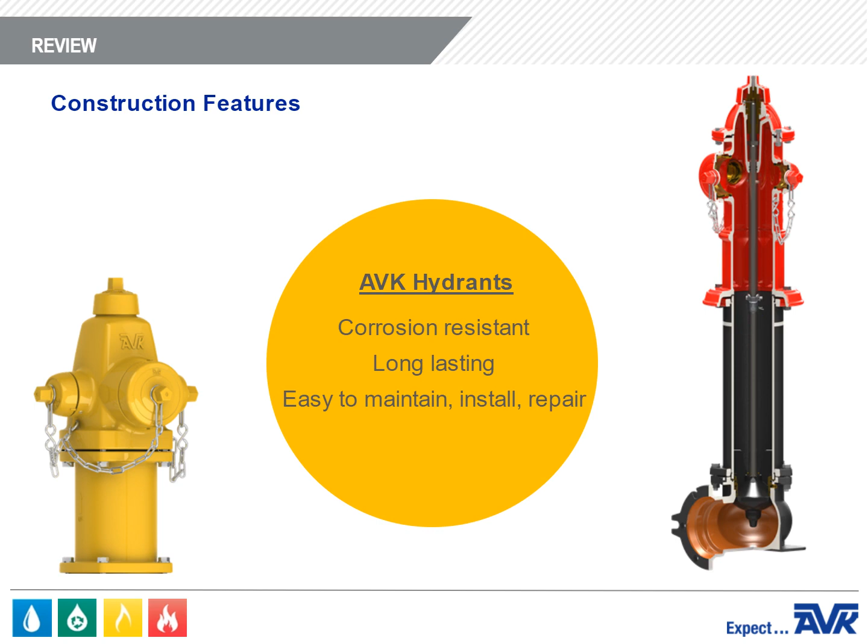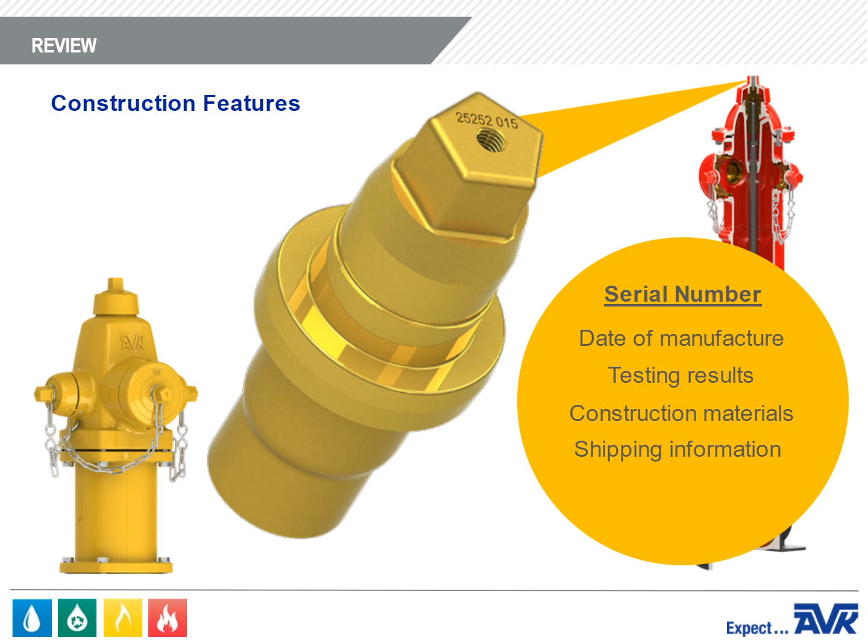There are many important fire hydrant construction features. Everything from the weather shield to the stainless steel upper stem to the breakable joint are designed to make AVK hydrants corrosion resistant, long-lasting, and easier to maintain, install, and repair. The unique serial number at the top of the hydrant allows AVK to track the date of manufacture, testing results, construction materials, and shipping information to allow for the industry's quickest and most comprehensive customer service.

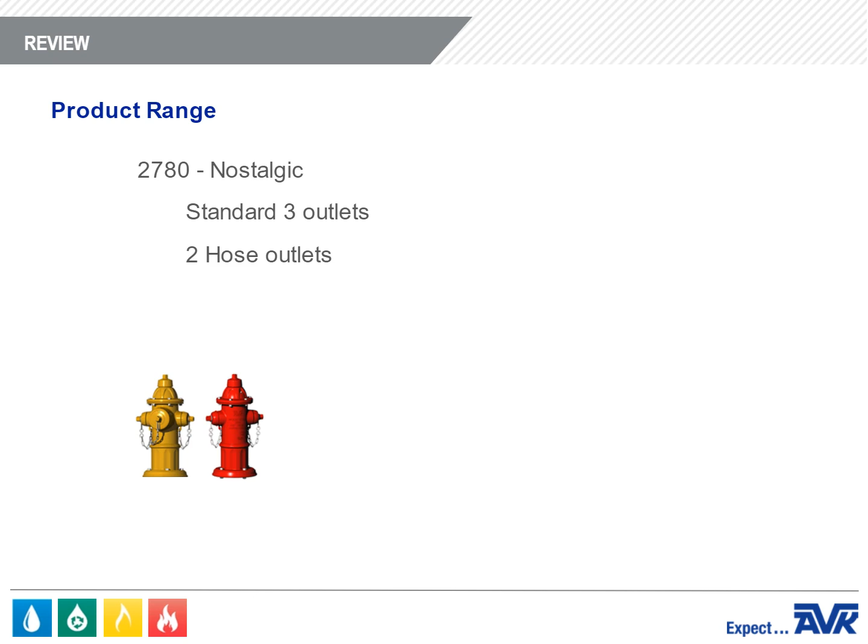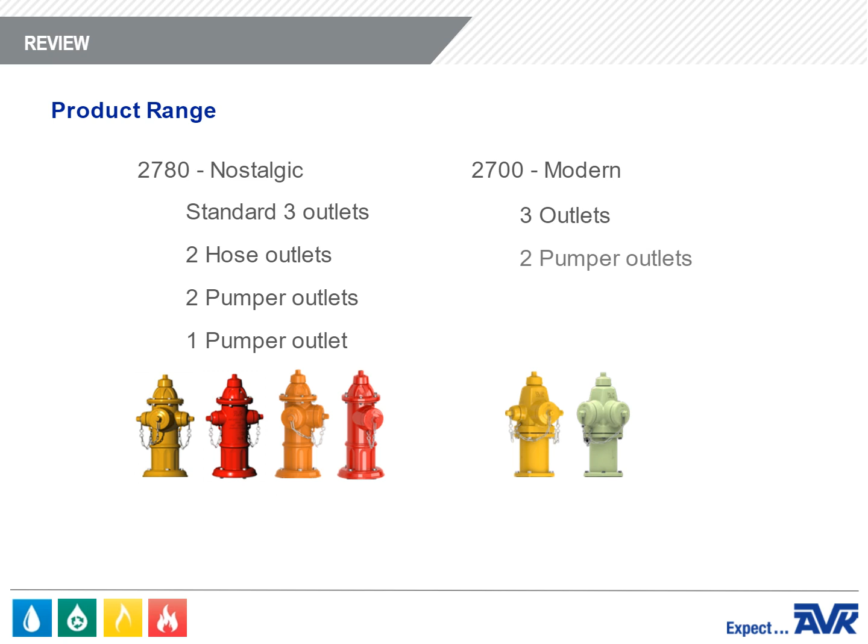AVK fire hydrants have a low parts count, which means our customers can maintain a lower parts inventory and need far less space for parts storage. In addition, all AVK hydrants have interchangeable parts, and all new modifications are designed to retrofit to previous versions of the Series 27. The product range of the Series 27 fire hydrant is quite broad. The 2780 or the Nostalgic can be configured with the standard 3 outlets, 2 hose outlets, 2 pumper outlets, or a single pumper outlet. The 2700 or the Modern can be configured with 3 outlets, 2 pumper outlets, or a single pumper outlet. We offer extension kits from 6 inches to 60 inches, and we can also do custom lengths.

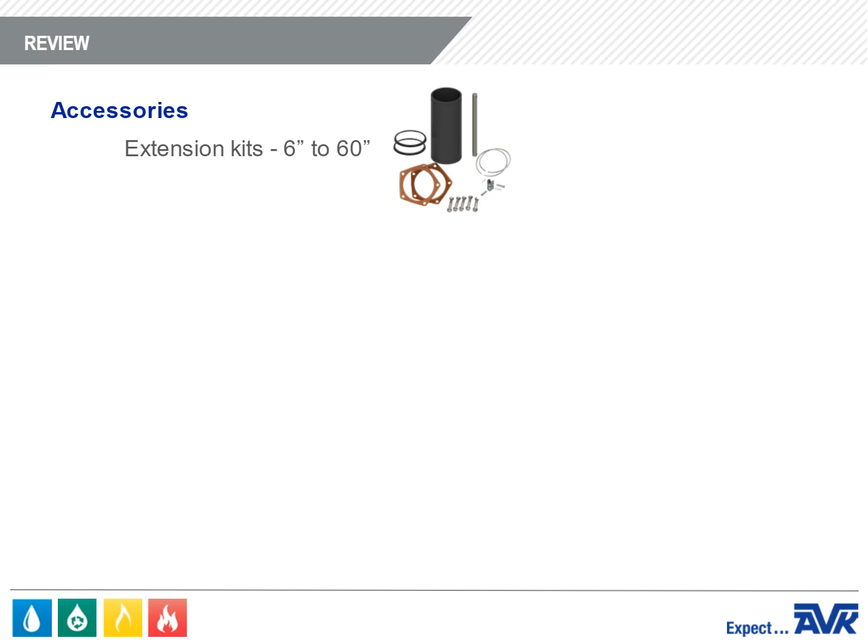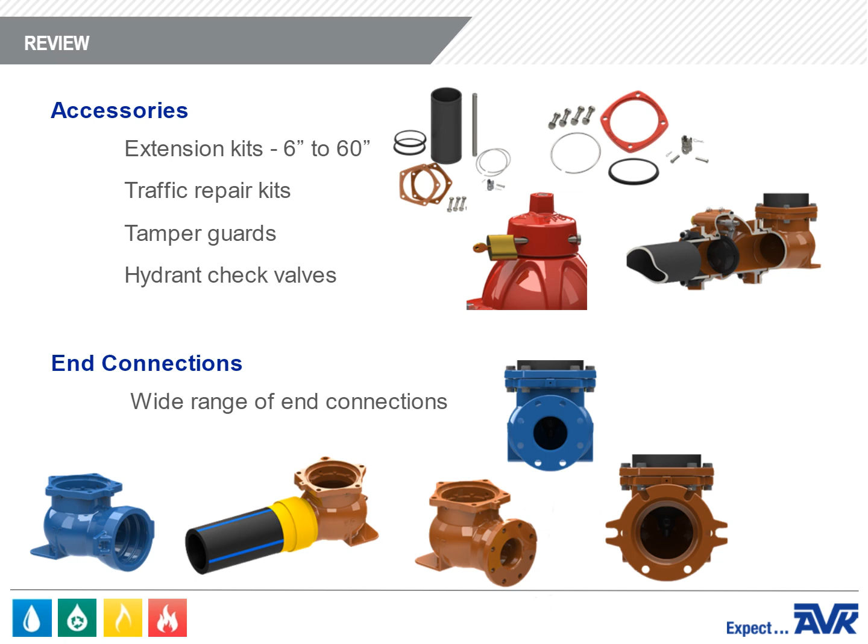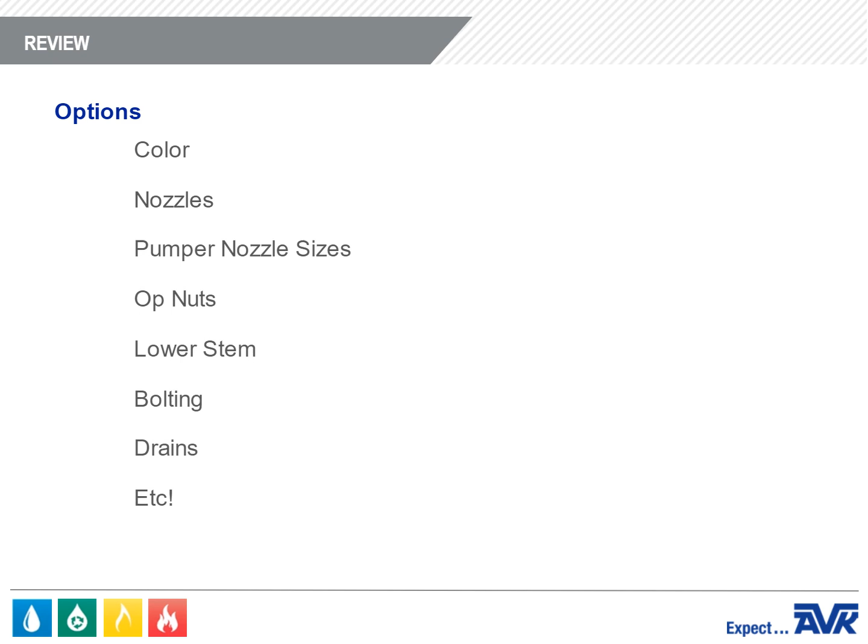We offer traffic repair kits, tamper guards, and hydrant check valves. AVK provides a wide range of end connections to connect the hydrant to the distribution system. We also provide ISO flanges. The options for an AVK fire hydrant are almost limitless. There are so many different options that we use an AVK hydrant specification worksheet. This ensures the customer gets exactly what they want. Congratulations! You've completed this module.